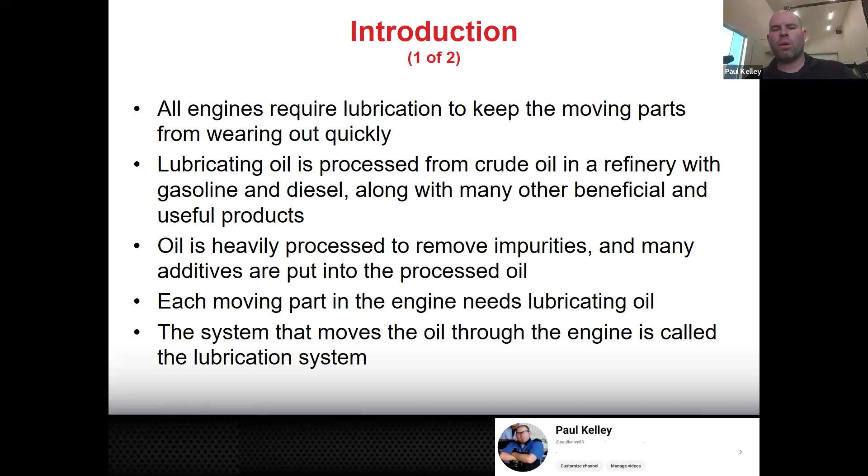In the refining process, they will make tar, like tar to put into asphalt. Asphalt is petroleum based. They'll pull that out, they'll separate it, and then other parts of the oil that they extract will actually become thin, like gasoline, diesel, jet fuel. It can even be used to make propane or natural gas. That's all being extracted or refined from this crude oil.

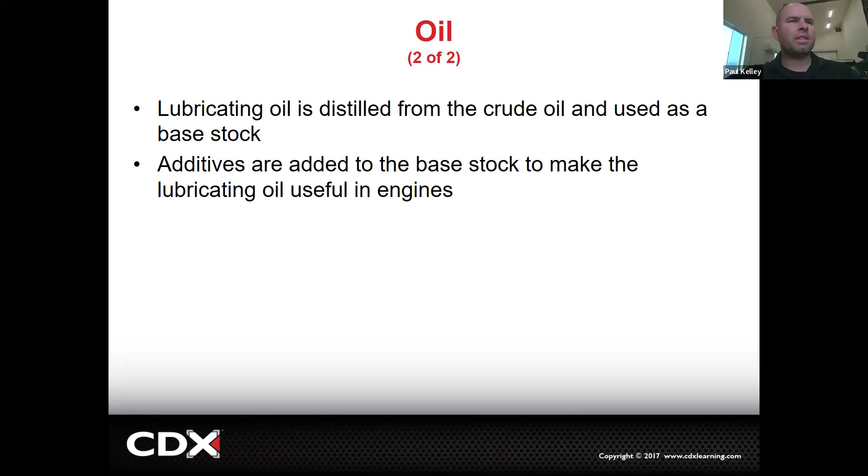I want to actually come back to that in a little bit because the next slide tells you the purpose of the oil. And this is in no particular order, but first thing, it lubricates, right, which just means to lower friction. So to put a quality of oil to the test, it'd be hard to say this one lubricates better and this one lubricates worse, right? Because you'd have to really do that in a lab. They'd probably have to take like a block of steel that weighs a certain amount, put it on another block of steel, put a layer of oil in there, and then measure how much pressure it takes to slide the block of steel. So if the homie's whipping the dipstick out and looking at the oil like this oil is better, that doesn't evaluate whether it lubricates better. You know what I'm saying?

But for a rod bearing, remember the rod bearing is getting punched in the face by the power stroke all the time. As soon as that spark plug ignites, that flame front moves down, it puts a lot of pressure. So that connecting rod is trying to push down and have that bearing surface touch the crankshaft at the rod journal. The oil itself should cushion that. That's part of the reason we need not only just some oil in there, we need pressurized oil, let's say 20, 30, 40 psi, to be able to withstand those power pulses to prevent that bearing from contacting the crankshaft. So the ability of the oil to cushion, that's a hard thing to measure. I'm not really even sure how they measure that, to be honest. I know a little about the friction.

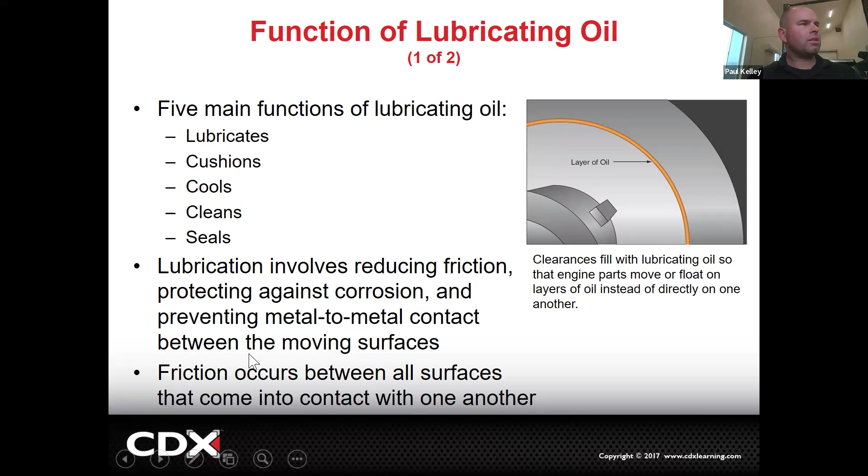Okay. So again, lubrication involves reducing friction, but also protecting against corrosion, preventing metal-metal contact. So that's all the stuff we kind of summarized right there. And then, generally, friction can be good with brakes. That's why we don't oil our brake pads. Friction would be bad for engines. We want zero to no friction from an engine if possible. If you had an engine that had no friction, it would last forever. You understand? There would be no need to replace it. So the less friction we have, the more the engine will last.

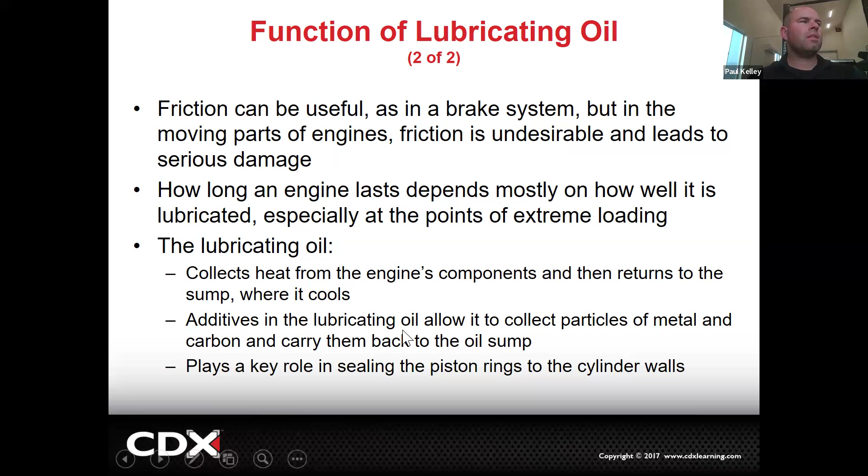And that's not focused on the pistons and the rings going up and down the cylinder. We're more looking at like the crankshaft and the bearings and the rotating parts. We want to be as close to no friction as possible. And so that's generally what it's talking about. It collects the heat and it should return to either the sump to cool or an oil cooler, which we'll cover. We put all those additives in there. And again, it helps to seal the piston rings. So if we were to look at an oil of choice, these are the purposes.

That's not to say you need to use Toyota brand. It needs to meet the API certification. It needs to meet American Petroleum. API is American Petroleum Institute. And then we'll actually come back to ILSAC, okay, International Lubricant Standardization and Approval Committee. So there's basically 2 different ways that oil needs to be certified, and then it's good. It doesn't necessarily need to be one brand or another brand. Okay. But if you look at the 0 and the 20, this confuses people.

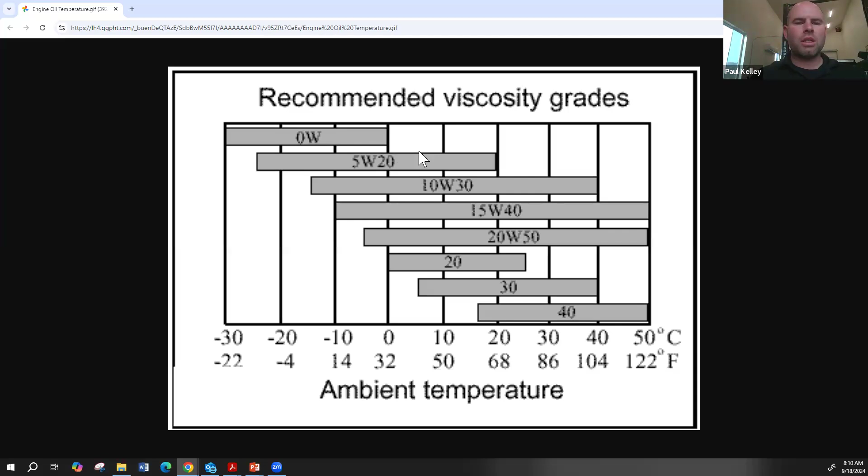So if you look at zero weight, it's too thin to be able to go down to 50. So zero's out. So if somebody says put zero in, you're like, no, zero is, in fact, actually, zero would be fine, but zero doesn't go warm enough. So I actually did that wrong. Let me back up right here. If it goes down to 50, 40 weight's out. 30 weight's just barely in. So on the low end, we have to have the coverage of the oil go below the lowest.

Now, to make this a little more interesting, I'm going to tell you some of the things I've seen on the way in, like in another couple months when it's December, or at least end of November, when we're on our way into Cypress at 6:40, 6:30, look around. You may see frost on some of those buildings occasionally, not every year. If you see frost on the building, you're not at 50, you're at 32.

All right, so let's just say the customer lives somewhere where it gets a little colder. Like for me, this morning was 47. In another couple months, I'll easily be hitting below that 32 number. That means for me, the 30 won't work. For you, the 30 may work, but for me, the 30 won't work.

Let's just say the customer in the 4Runner says, oh yeah, I might go to Big Bear. Okay, cool. Well, Big Bear, you might actually get to, maybe not, but maybe the 14 number. If you're going to see 14 for the low, the 20's way out, the 20W50's out, your 15W40 would be maybe just on the line. But let's say it got to 13, now your 15W40's out. So you really can't run 15W40 if there's any chance of going to Big Bear, right?

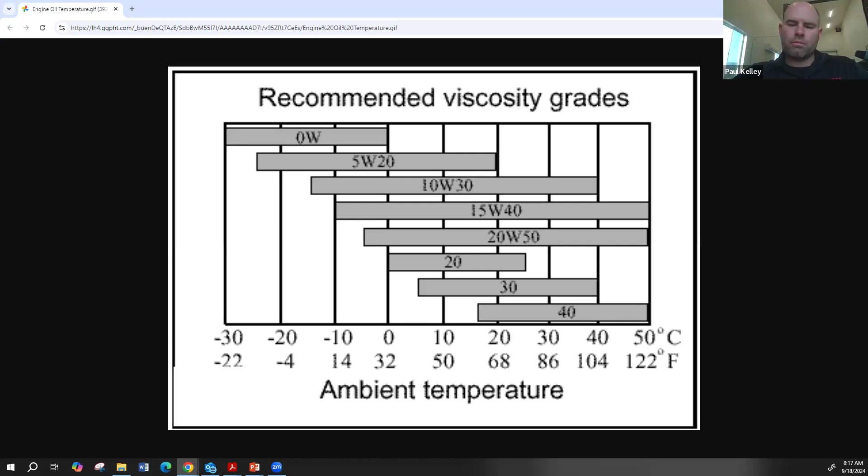So I spent a good part of my life learning the facts and learning the truth and trying to give it to you. You just disregard it for something that someone else said. You know what I mean? Let it go. Let it go. But as far as the facts go, service manual. Sounds good. Mitchell, you got your question now.

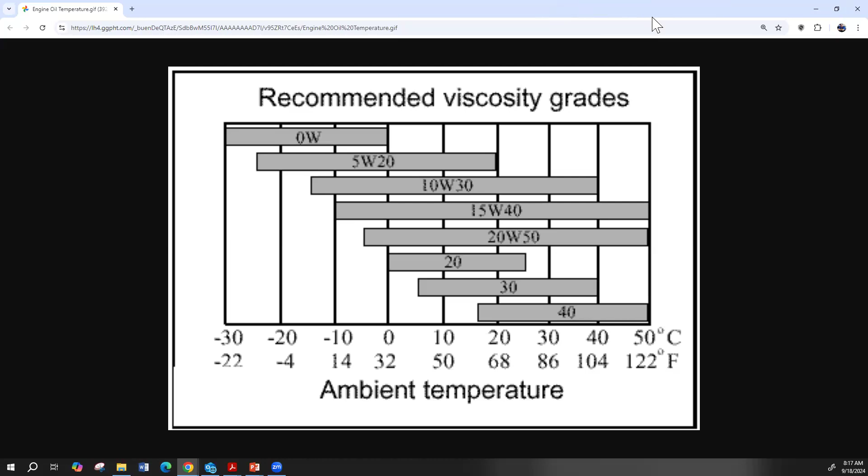It's not really a question, but once we had a RAV4 come in that was sold in the Mexican market, it had a Toyota Tijuana plate on it, and the oil cap said 5W30. And think about why. Mexico's south, right? So Mexico's significantly warmer. If it's warmer, you want a thicker oil, right? So in Mexico, they don't have places that are going to get below zero. So it makes sense, and you're exactly right. It has to do more with the climate.

So back in the day, they used to give us these types of things, but now they just don't really give us those charts anymore. So essentially, as the dealership technician, I'm instructing you, follow what the service manual says. And if the service manual is a US based service manual and the car's in the US, I would not be doing what the global market service manual says, because that's not where the car is. Kind of makes sense. All right, cool.

So now we'll jump in a little bit more because we're going to talk more about the oil. So here's your viscosity. High meaning the higher number. The 5W30 is a thicker oil than the 0W20. So the high viscosity 5W30 is going to be slower pouring, and the low viscosity is going to be quicker. That's how they measure it. And that all has to do with how the oil is going to flow through the system.

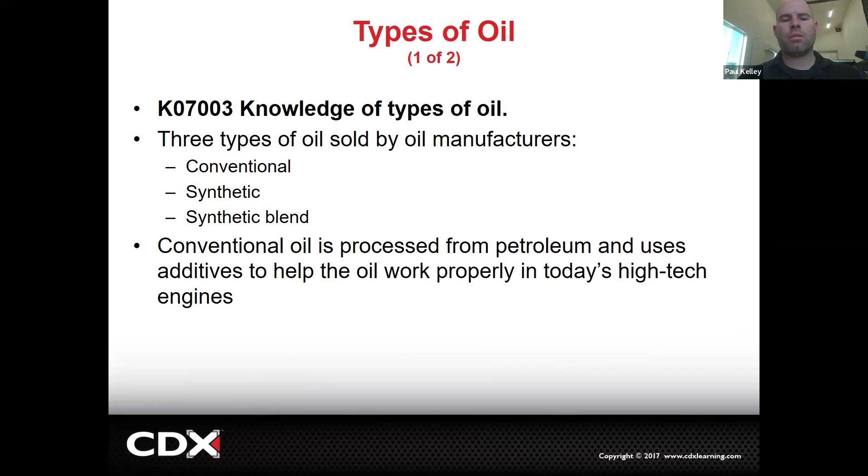Here's literally pulling oil out of the ground from those underground wells. They pull a bunch of stuff out, like they pull the wax out. They'll actually use the wax for candles. They break it down. They could break it down into basically what's considered mineral oil and then combine the additives.

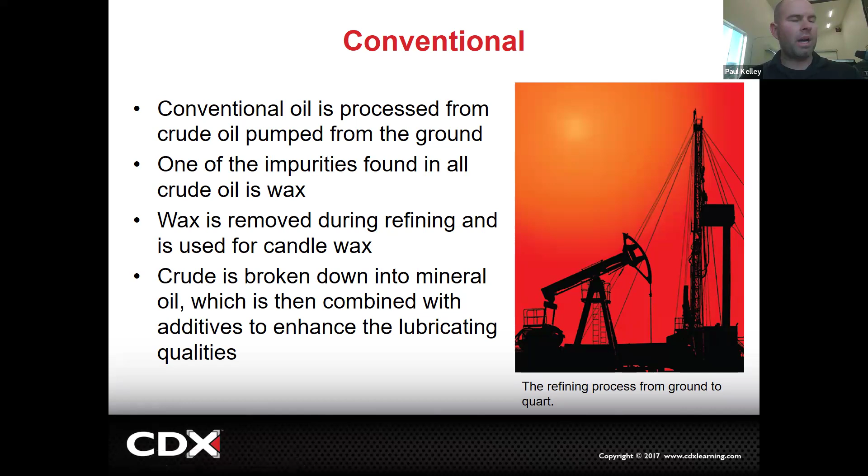And then let's say you had synthetic. So type 3 is not exactly a true synthetic. Like they do more refining, but it's a bit different. Type 4 is it never came out of the ground. They made it in a lab. They formed it in a lab. But both of them are more costly to manufacture.

So if you want a synthetic oil, cool. It's going to be more money. It just is. It costs more money. You don't get to pump it out of the ground. You have to actually manufacture it. It takes more time. And then advantages. Okay, so we could go into a ton of detail, but we'll keep it simple. Better protection against engine wear, so that's friction. Can operate at higher temperatures.

So everything we saw on that previous page, I don't know if that was for synthetic or conventional, on that chart. I'm not sure. That was for whatever that vehicle called for. It's probably conventional, right? They have better low temperature viscosity. So when you want to actually be able to run to a lower temperature, you could change over to a synthetic. Fewer wax impurities. So wax impurities, do this word here, coagulate.

If you guys ever cut yourself and your blood leaks out, what happens? Put a Band-Aid on it. Okay, you can put a Peppa Pig and George Band-Aid. But what happens when you take the Band-Aid off, you're no longer bleeding. How come? Starts with an S. What's it get on there? It grows something. Scab. Exactly. A scab is your coagulation from your blood.

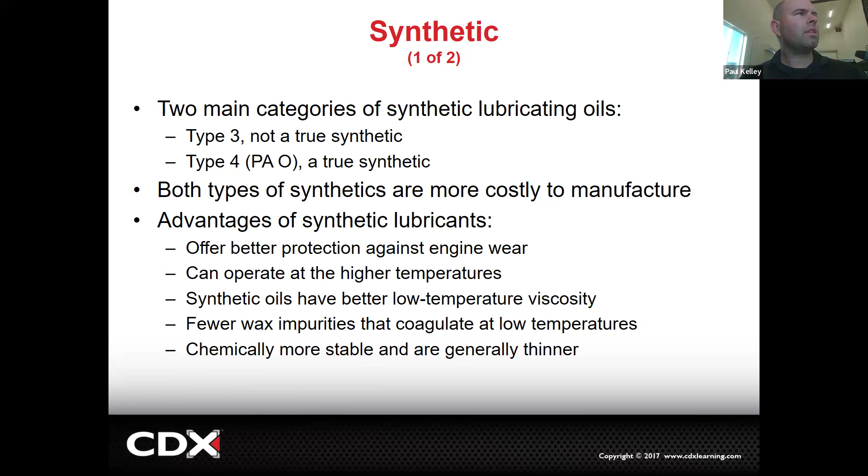Okay, but it's also chemically more stable. Some people would say the thinner oil tends to find the leak, and I don't know about all that, but there's some reputations about synthetic. And another thing I'd like to clarify here is, big question is, if you ran conventional, you can't change over to synthetic, okay? And that is not exactly true, but I'd like to clarify somewhat.

If let's say you're running a conventional oil the entire life of the vehicle, let's assume, it's not necessarily true, by the way, let's assume that oil has less cleaning detergents, cleaning agents in there. That means it's not going to keep the engine as clean, right? And those imperfections and those debris are going to be in the engine. So basically what I'm telling you is the inside of the engine is going to be kind of dirty.

Now, if you take that conventional that's been in there every 5,000 miles for 100,000 miles, and you put a synthetic in there, and the synthetic has a lot of cleaning agents, the cleaning agents are going to clean it a lot, right? So the oil flowing through your system is going to look like what?

I think, how's it going to look if it's picking up all the imperfections as it flows through the system? Dark. Exactly, dark, dirty. It could have too much debris in it. All of a sudden, you might have more debris flowing in your oil than you ever used to. And that's where some of these, whether true or not, horror stories would come from. Like, yeah, I went with synthetic and the engine seized up. I went with synthetic and all of a sudden I lost oil pressure because all this debris was on my pickup tube and my sump.

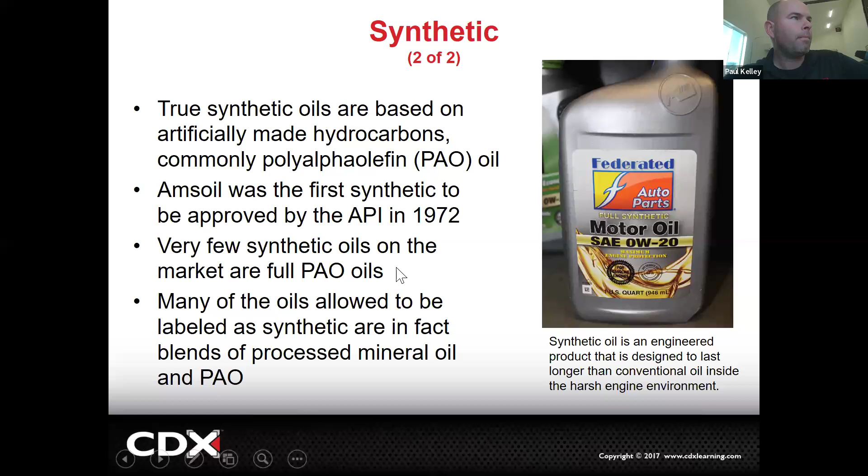Then let's say you buy oil that's high mileage. Generally, the main purpose of a high mileage oil is they put some additives in there to make your seals swell up, like your rubber rear main and valve cover gaskets and stuff. It'll actually make them swell up, and that might potentially help the leaking problem. It's not a coagulator though. It doesn't coagulate the oil. It just swells the seals, maybe.

And then some of these higher mileage oils have extra things like polymers to lower the friction even further. So generally speaking, a high mileage oil is actually a better oil than just the regular. So I've actually got right here Mobil 1 5W30 and Mobil 1 5W30 High Mileage. And the only reason I got the high mileage was because it was on sale.

I don't need high mileage because my Hummer now has like 180-something thousand, but the engine's got like 5,000. So it's not high miles. The truck is, but the engine is not. And we got the Camaro, and I think the Camaro has 35,000 miles. I don't have anything with high miles that I need to change the oil in. My motorcycle has some high miles, though. That's the workhorse for me, right?

I don't need high mileage oil, but it was on sale, and it has these additional additives. I probably don't really need the seal swelling agent, but high mileage is an improvement, at least marginally. So if you have a low mileage engine, to say you can't put high mileage oil in it, that's not really true. It's not necessary. I wouldn't charge the customer more money for it because you don't need extra polymers or seal swelling agent. But if it's on sale, it's fine. Okay, so that's why I got that.

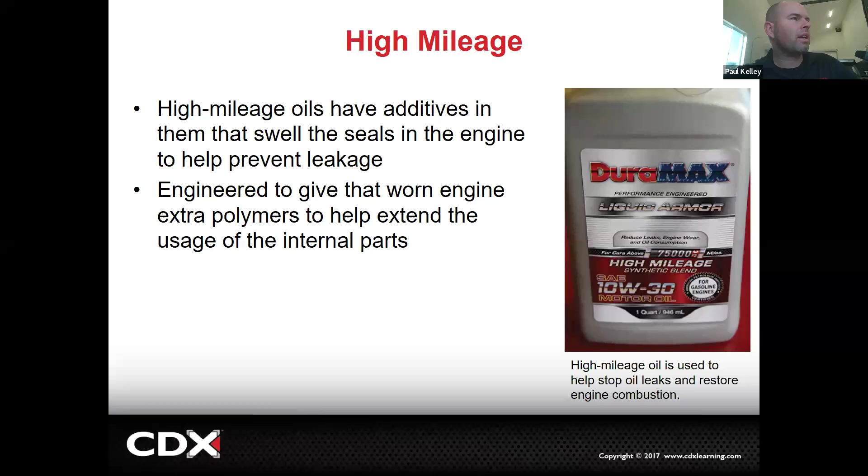And then there's some heavy duty stuff like, for example, Rotella T, a pretty well liked product, but this is SAE 15W40. This is actually really made for diesel. That's not to say someone may not run it in a gasoline engine, but the diesel oil is much more demanding. A diesel compression ignition engine has a lot more heat, a lot more pressure. From the factory, those things are running like 30 PSI of boost. So trust me, they need to hold up better. You could, in some cases, run a diesel oil in your engine and have the engine be happy.

But here's the problem. All engines burn a little bit of oil, and that burnt engine oil ends up going through the exhaust and your catalytic converter. I'm not so sure your cat is going to be happy burning a little bit of Rotella T diesel engine oil, so that's the main reason I wouldn't really recommend it. They are a little different, gas to diesel, so consider what you're buying. If you're running a diesel work truck that calls for a 15W40 and you see Rotella T, which is usually pretty well priced, that could be good, but you don't really want to run it in your gas BMW that gives you this viscosity range.

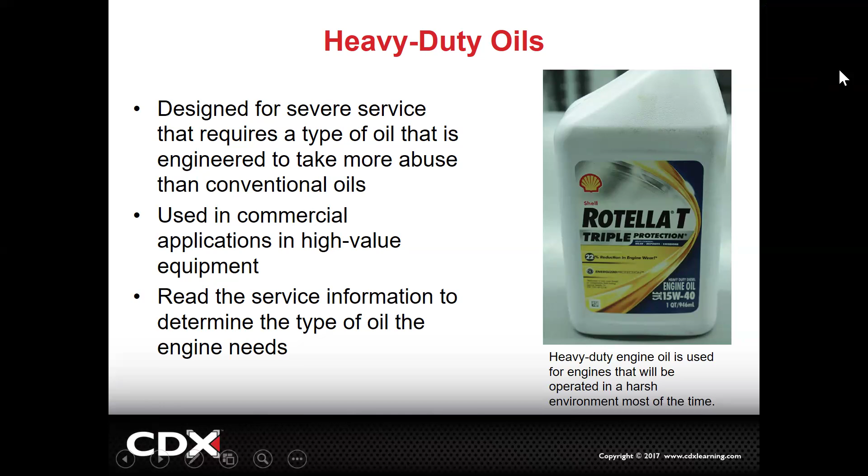Colin, I see your hand again. Did I miss you? No, I think I forgot to lower it down. Okay, very good. I forgot to lower it too, so we're both guilty.

Now let's jump into additives. Extreme pressure additives, oxidation inhibitors. You guys know what that is. So extreme pressure has more to do with the rod pushing down on the rod bearing and crankshaft. Oxidation. Who knows what oxidation is?

Oxidation with iron is like rust. It has a reaction with oxygen; oxygen breaks it down, basically. The paint or clear coat on the roof of your car, with too much sun, you'll see will become oxidized. The sun kind of breaks it down, then it's exposed to oxygen, and it basically flakes off. So oxidation is breakdown by oxygen.

Corrosion inhibitors are essentially stopping your engine from rusting inside. Unfortunately, you're going to have some traces of water in your crankcase. And if the oil doesn't have a good corrosion inhibitor, you can actually end up with rust in there. So we add these.

Anti-foaming is an interesting one. When your crankshaft is spinning, your oil level should be below the crankshaft, okay? They shouldn't touch. But even still, your oil's getting sucked up by the pump and churned through the gears and all that stuff. You don't want your oil being frothy. Let's say you make yourself a smoothie and run the blender, it gets kind of foamy, kind of airy.

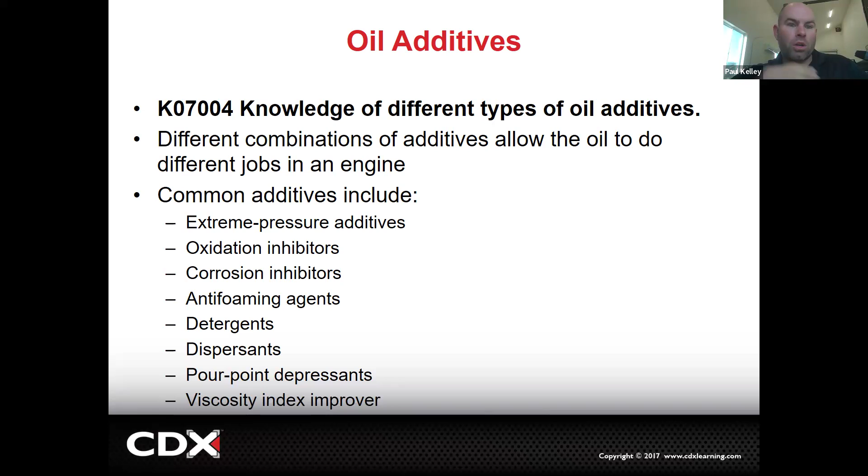Pour point depressants and viscosity index improvers both have to do with stabilizing the viscosity. Mainly to make it a good multigrade that can go down to negative 22 degrees but go up as high as 122 degrees. So we add a bunch of stuff in there. This all costs money, obviously.

And then ultimately, again, deviating from the standards, that would be where you would be wrong. If you recommend the oil the service manual calls for, you're functioning exactly how you were designed. You are not designed to be doing statistics and giving advice on which oil. You just don't know. Okay.

Just be really honest. If you sit down and you're honest with yourself, you have no idea if the super moly, ultra mega, super duper gold plated oil is better. You don't. You just don't. You have no idea. Okay. Somebody else does, and that's why somebody else publishes which oil you should use. Cool.

Then API gets in there. API is the American Petroleum Institute, and they set the minimum performance standards for lubricants. So when API sets the minimum, all the oil manufacturers have to pull up to the bar. Then they have to send it into API, and API tests it. If it passes, API gives them API certification. Then they can put the little starburst symbol on their product.

Kind of makes sense. So now if you look, oil rated S cannot be used in compression ignition. So wait a minute. S. Anybody think they know what S stands for in this case? Because it doesn't give a lot of context here. S, compared to compression ignition engines, which need the C. What ignites the air fuel mixture in our gasoline vehicles? What starts the fire? Spark plug.

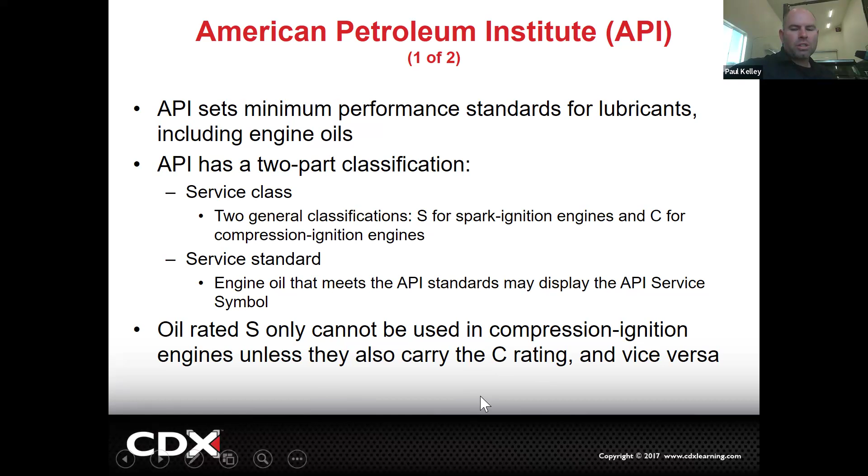Exactly, spark. S is spark. That's it. S is a spark engine. C is a compression engine, which basically means diesel. Cool. So they're different; that's what it's saying. This gets all into API. So SN, GF-5, these are the standards.

And by the way, a while back they went to energy conserving or resource conserving. So the government is involved in this. The government wants them to remove a lot of the harmful things. Zinc, for example, was really good for flat tappets coming across the cam. The zinc would really lubricate them well. Zinc is not so good to be coming out the tailpipe.

And so the government's involved in making them cleaner, hopefully achieving better gas mileage and stuff. So there is a little bit of input as far as making them better for the environment.

It's not all on performance. So when I talked with an engine builder and tuner, I usually want to get other people's perspective, right? So this is not a manufacturer guy. He doesn't deal with the manufacturer at all. People bring him their cars and he builds them hot rod engines and does tunes. It's cool stuff you guys would like. But he's never really had the manufacturer type training. He's a builder, you know what I mean?

He makes cool stuff. So I asked him, well, what oil would you recommend? He said, well, I used to run Royal Purple, but then I would take these engines apart and they'd be all dark in there. And I would be looking to see if maybe I had like a PCV leak or combustion blow-by or something. And I don't run Royal Purple anymore because I just don't like the purple dye. So he kind of had a little beef with Royal Purple because of the dye. And that doesn't say that Royal Purple's bad. He just doesn't like it because of the dye.

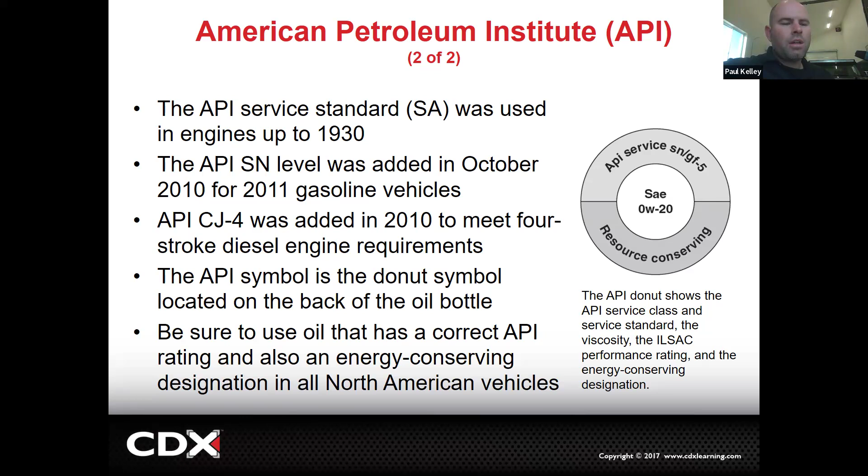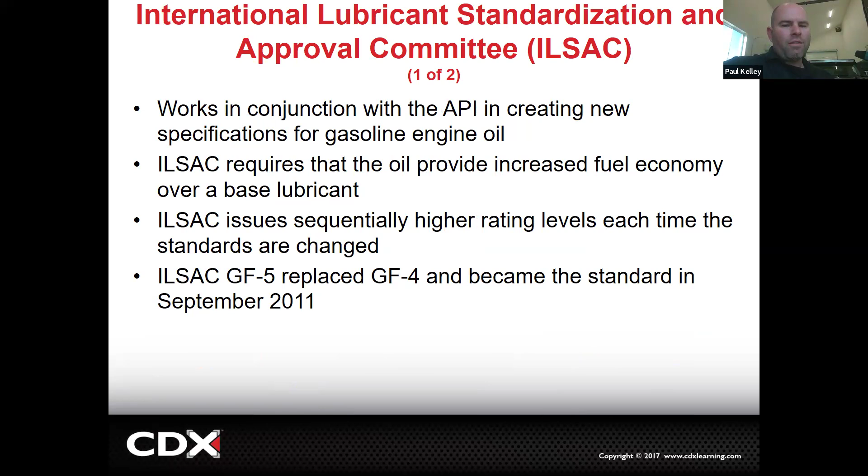If I'm going to shoot from the hip and make my determination, though, I'm probably not going to listen to an engine builder who started a little bit of a conspiracy theory right there. I'm going to probably go with the fact that the manufacturer will stand behind the product and offer me a new $14,000 engine if it fails, if I'm using the Mobil 1. Makes sense? So that's really my stance on it. But I'm telling you right now, I don't have the facts. I don't have the qualification to make the call, right? So if you're following what the manufacturer calls for, that's exactly what I would do to keep yourself out of trouble. If you become more qualified and you can come back and teach me something, let me know. You got my information. Cool.

So ILSAC jumps in and says ILSAC GF-5. I want to come back to this ACEA, API, which is SN, SM, and SL. So it meets all of these. Remember, it goes L, M, N in the alphabet. So if you have a car that calls for SL, this meets it. If it calls for SM, it meets it. If it calls for SN, it meets it. If a new one comes out, SO, it doesn't meet it, right? So it's almost like backward compatible with anything SN and older. But if SO comes out, this oil would not be good enough anymore.

It also meets Ford WSS standard, another Ford WSS standard, GM Dexos, Honda Acura HT06, right? So essentially what they're saying is, hey, this oil is certified by this one and that one and this other one. This oil is certified to everybody's standard. That's actually part of the reason I keep a bunch of Mobil 1. If you look, that's what this is. This is a Mobil 1 oil. It's actually guaranteed to protect for up to 15,000.

I'm not going to try it, by the way. I'm still changing my stuff early. That's kind of another side discussion. But the Mobil 1 oil, I believe, you know, the oil itself won't break down. The additives are going to be excellent. The corrosion protection, the temperature, all that type of stuff, I'm sure is amazing.

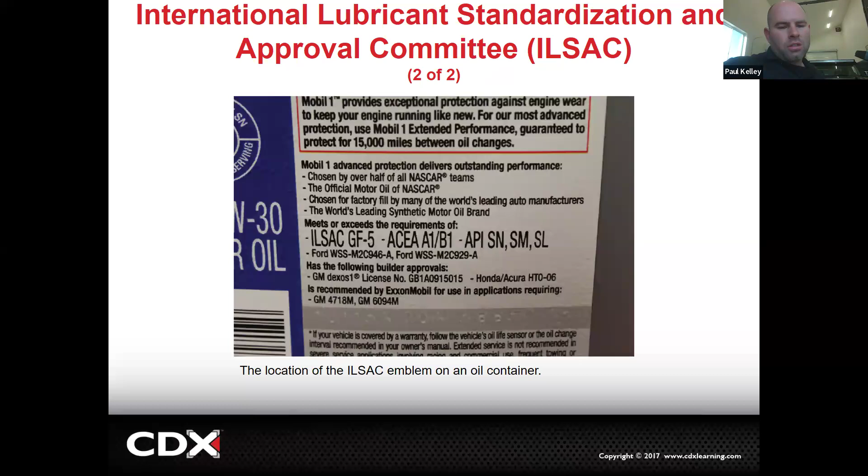However, would I recommend that to a customer? I probably wouldn't because it's just not my qualification. I'd say follow what your service manual says. I'd go with the service manual, not the back of the bottle saying 15K. The service manual wins out again. Okay, so a little plug for the Mobil 1 just because it meets all the certifications right there. So if I want to keep one oil on the shelf, I keep Mobil 1, and that's going to be great for like everything I touch.

Now, SAE, again, that doesn't stand for straight 30 or straight 50. SAE, that's Society of Automotive Engineers. So they also set the standards. They work more on looking at the engine and what the engine needs, and then making standards and making sure the oil meets those standards. So there's a lot of different agencies involved in this oil. Cool. And that's basically the summary.

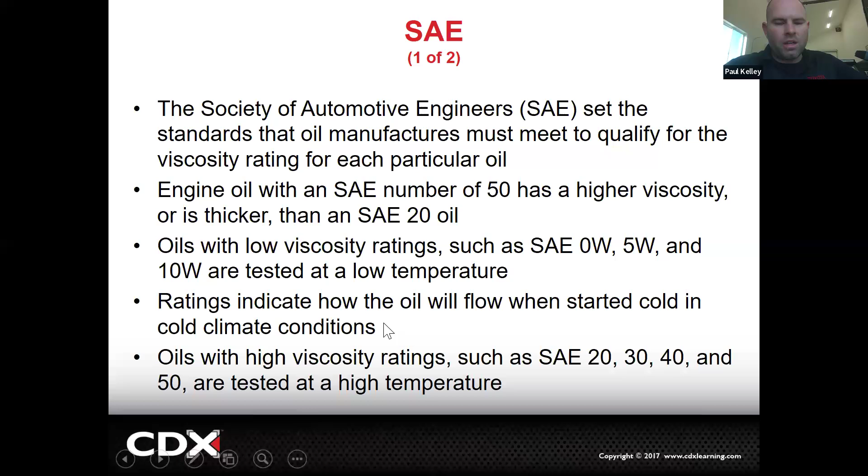We'll go with SAE. A modern oil blend of oils that combine properties of oil and the desired outcome and all sorts of additives and everything. So to meet the SN, they're going to need to have all sorts of additive package. So if it meets SN, don't think it's junk oil. Guess what? Walmart SuperTech meets SN. So if it meets the standard, it's not going to be trash. It's not to say it's going to be much above the standard. It might just barely meet the standard, where something else might exceed the standard. But I'm not really sure. We would have to send that out to a lab and have them test it.

Okay, so a cool YouTube thing to check out if you're interested, it's called Project Farm. That dude spends hours and days and weeks making a video to compare one oil versus the next oil, including having the lab results. They do some really cool stuff. And as far as I can tell, it seems legit. So they would have way more info than me because they would take that time to go through those tests.

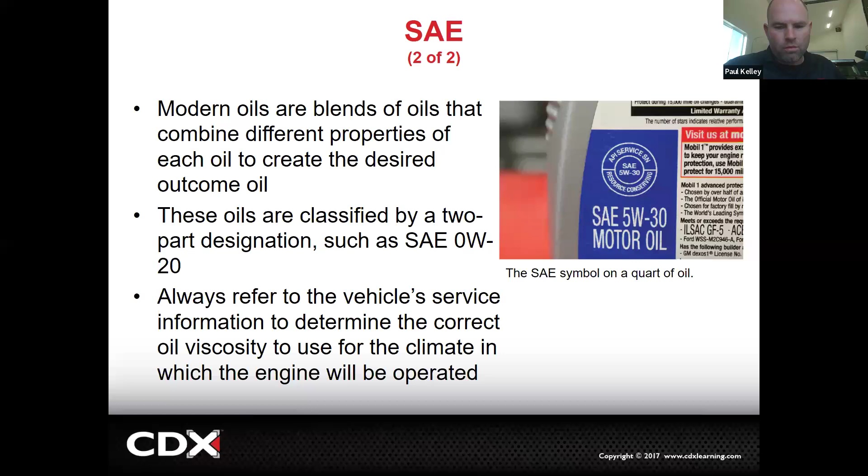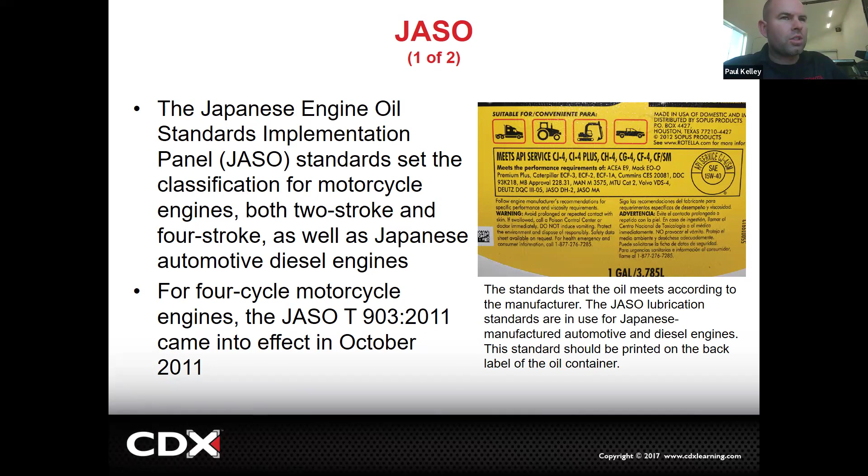And then JASO is Japanese Oil Standards Implementation Panel. So it's basically like what API, American Petroleum Institute, does, except in Japan. So if you really dig in the Toyota service manual, a lot of times it may call for JASO standard X, Y, and Z. But again, we're doing it kind of our way. So if it meets our stuff, you're going to be good. But if you look for it, cool. And then ACEA, remember I mentioned that one, European Automobile Manufacturers Association. So that's the other one. The different major continents seem to have their own.

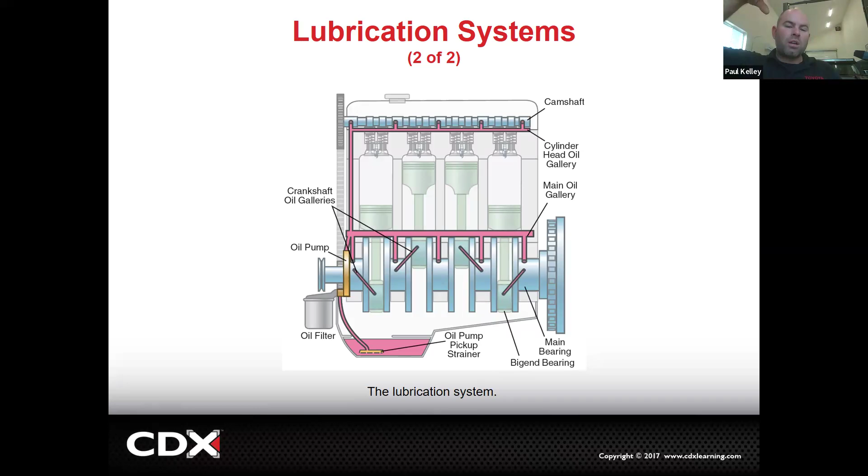Okay, here we go. That's some of the reasons that people will buy some of that Lucas oil treatment stuff, because they'll have a little display where if you put Lucas oil in it and you turn the gears, the Lucas oil will cling to the gears better. And so that was one of the sales gimmicks from back in the day.

So as we consider, all of this stuff right here is what's called pressure fed. Pressure fed means the oil pump sucks it up and pressurizes it at PSI. Let's say our goal is 40 PSI of oil pressure. That might be at a certain number of RPM or whatever, but let's say 40 is our goal. 40 pounds per square inch of oil pressure should be spraying out of all these little passages. That means it's force fed, basically. That's one aspect of lubrication.

That's always how crankshaft main journals, crankshaft rod journals, camshaft mains are fed. We don't really worry about the cam lobes. Those aren't pressure fed, but all those are gonna be pressure fed. If it's got piston cooling jets, those are gonna be pressure fed. The oil galleries are all gonna be pressurized, even though we're not really trying to feed them. We're just using them to transport oil.

But when there's a plug on the side of the block or something, and it goes to an oil gallery, that sucker is pressurized in there. You take that out, you might be able to actually put an oil pressure gauge. Or if you want to do your 3-pod A-pillar race car stuff, and one of them's oil pressure, you may have to run a little oil line or an oil pressure sensor that uses a wire. You're just going to punch into one of those oil galleries, and that's going to give you the pressure of the whole lubrication system. The pressure here should be the same as the pressure here, which should be the same as the pressure there, unless you have some sort of restriction in the oil galleries, okay?

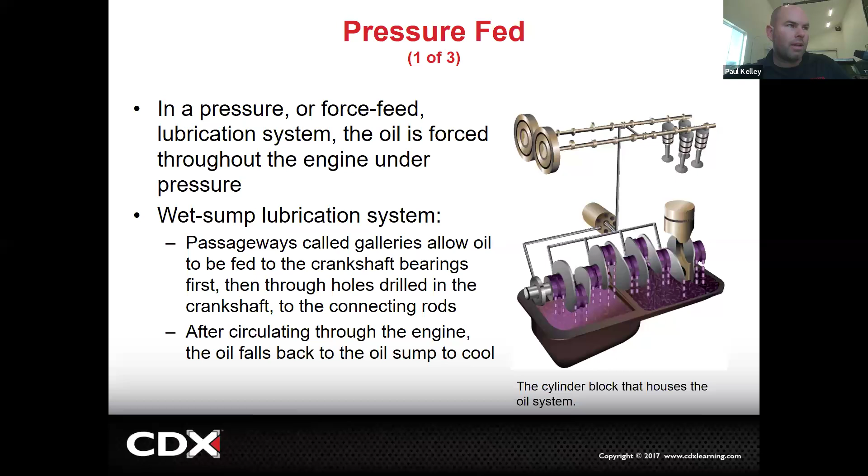So if you wanted to have a race car, a real race car, you probably want it to be a dry sump, because there is no oil sloshing around. The oil is held in a tank and the pickup is deep into the tank. And even going around extreme turns and upside down practically, it would keep the oil not only not foamy and aerated, but it'd keep the pickup well submerged in the oil no matter what type of turns you did. That's the main difference between wet sump and dry sump.

There's not very many cars out there that were dry sump, but I recall when the first C6 Z06 came to the shop at the dealer, and the PDI guy, who was smart, he knew a lot, went to check the oil and he started freaking out, like, this thing doesn't have oil in it. I don't know what to do. And he was a guy who knew a lot, but didn't really know how to follow the service manual well. So he started kind of freaking out. He ended up actually going and getting the foreman, and the foreman was like, I don't know. We've never had one of those before.

It was the first one we ever got, which I got stories about that car. I'll tell you. Good memories. I'm not sure I'll say it on video though, but it was a cool one. That was the first 505 horsepower factory, V8 427 dry sump, 6-speed, dark blue, just good times.

He checked the oil and there was no oil on the dipstick. He's like, what the heck is this? So he literally started it up, drove it in, shut it off, checked the oil, no oil on the dipstick. And the dipstick went into the oil tank. And it was just kind of weird. He went to the foreman, looked it up on service info and said, oh, you have to shut the engine off and you have to wait 3 minutes before checking the oil. So they went back down from his office and they went to the car and checked, and it was perfect.

So the way you check the oil level on a dry sump is different, because the oil doesn't just fall into the sump. With the dry sump, the oil has to slowly return through the oil pipes and all that type of stuff, which will slowly bring the level up in the external oil tank, which a lot of times can have like cooling fins and stuff.

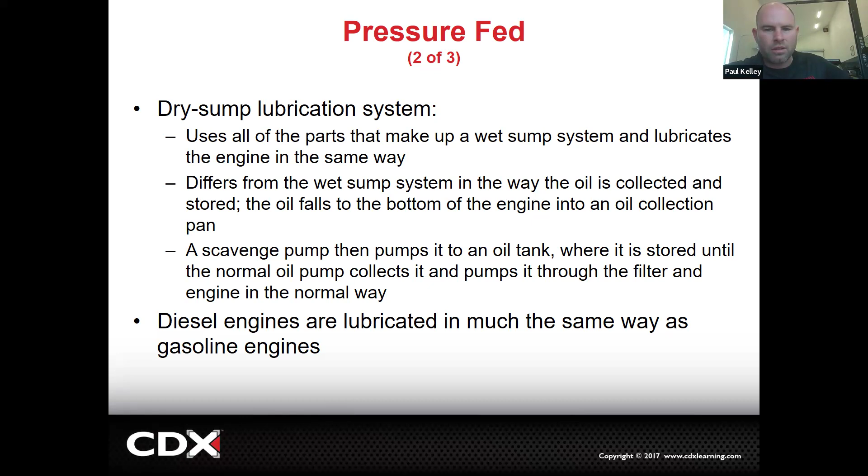Other than that, the dry sump would need to have a scavenge pump, which pumps it back to the oil tank. So the scavenging pump basically scavenges the oil and gets it back to the tank. It's kind of interesting. Okay, so that's the main thing about those. And we talked about pressure fed again. I think we're probably pretty good just understanding diesel engines have different levels of heat, different levels of pressure, just different demands with those compression ignition CI engines.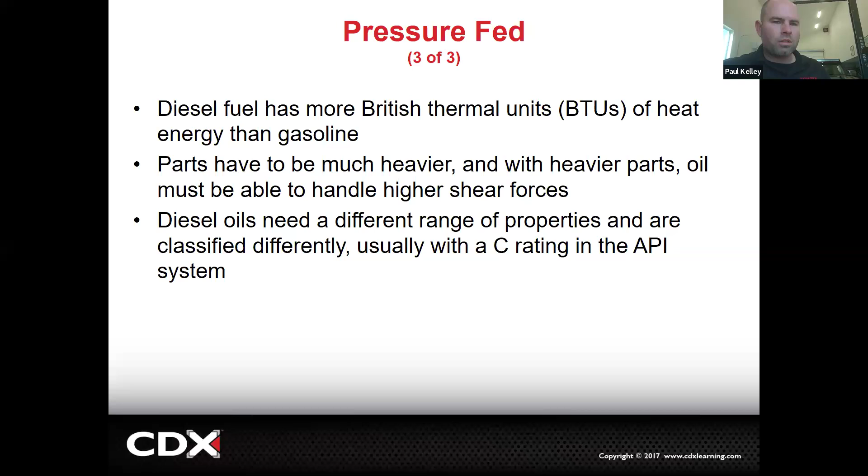Okay, then there's another type of lubrication. And this one's splash. Splash lubrication is literally just stuff that gets splashed. Splash lubrication, it's hard to go wrong. Like on this old air-cooled piece of crap, they would have a little dipper, they called it, and it would come around and hit the oil, and it would just sling the oil up here, sling the oil over here. Everything was just kind of getting splashed with oil. Does that sound as precise, or does it sound a little more approximate?

It's just kind of approximate. It's like, yeah, it's going to get splashed. By how much? I don't know. What's the pressure? There is none. We just hope it gets splashed. So it's a reliable system, but it has no way to cushion the blows of a combustion stroke because it's not pressurized through a journal, but it's simple.

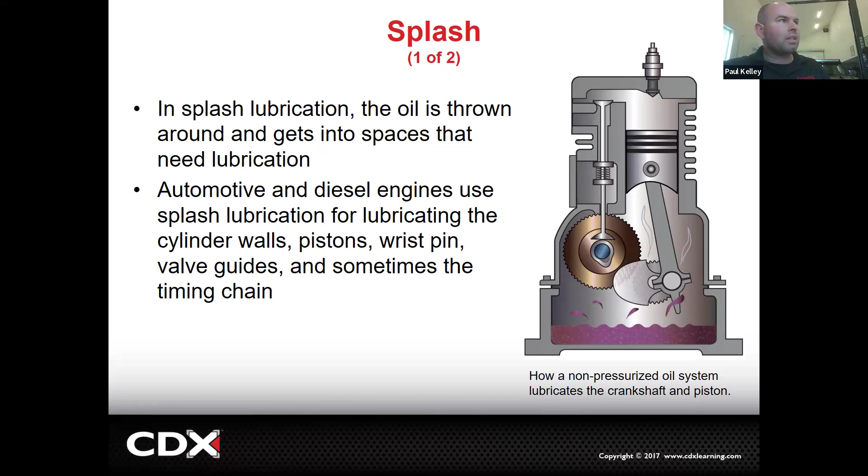So we don't do a whole lot of that, but even within our modern engine, there are still things that are lubricated just by splash. A lot of times we'll send oil up to the head, and once it gets to the head, we just let it splash around and lubricate some stuff. It's not real precise. Okay. So it could be either, especially on small engine stuff when they talk about horizontal crankshaft with the dipper and things like that. All right, but now here's the more modern system that's really extensively explained.

When you're in warm up, the coolant's kind of warm, but eventually, let's say your coolant stabilizes at 200. Your oil under hard work and going up hills, your oil could get hotter. So if your oil was 220 and your coolant was 200, you're actually going to pass heat into the oil cooler to cool it down, right? That's how an oil cooler works.

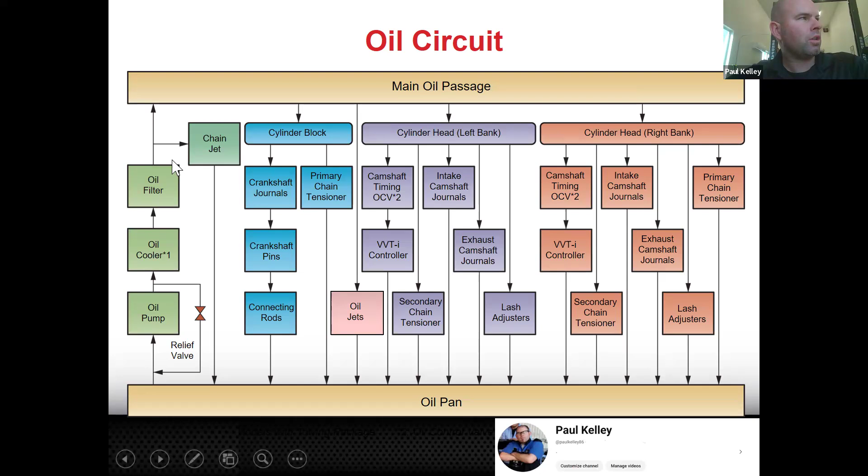I talked to somebody who's a foreman at the dealer, and they said they had one where they thought it was a filter. They put a new filter on it and it fixed it, but it's not supposed to. So I take that with a grain of salt that it might have been something a little bit different, because anytime an oil filter clogs up, the oil should just bypass, which means the oil is unfiltered, but not causing low oil pressure. Okay, that's what you need to know. Cool. Now we go to this.

It's because you're trying to get the gear in the right spot to slide onto the flats that are on the crankshaft. It could be a little tricky, right? That's its location. Here you can see it gets sucked up right here, goes in, goes to the oil filter, and then goes out to the main oil gallery to all the places it needs to go. That's what it looks like as well.

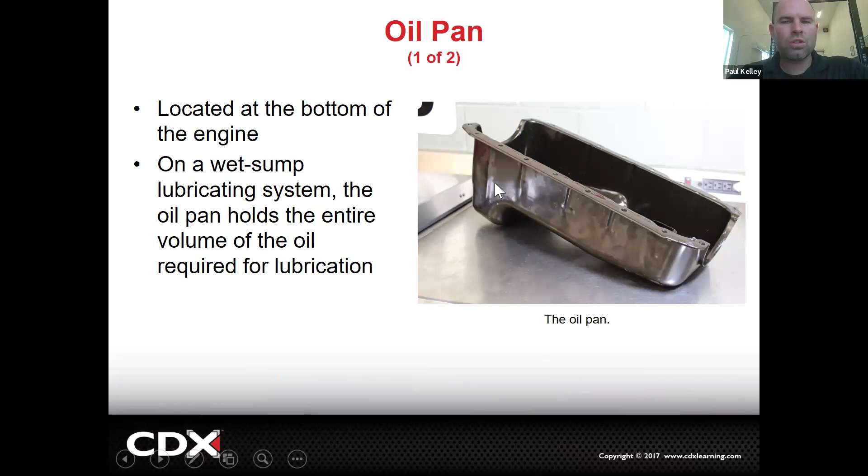And then here's your oil pan. So you'll notice the oil pan gets really deep right here. Where it's deep, that's called the sump, and that's where the oil pickup tube goes down, and it has the pickup and the filter, the screen. So that's common. Here's your drain plug, you know about those.

And then here's a windage tray. So the purpose of a windage tray: the crankshaft is above and the crankshaft's whipping. You don't really want oil being whipped up because then it makes it into that foamy smoothie, okay? If you were, for some reason, going around a lot of turns and your oil were sloshing all over, it could tend to get foamy and whipped up. So we put what's called a windage tray. The windage tray is supposed to keep the winding action of the crankshaft away from the sump where the oil stays. That would be a little bit of a high performance design. A lot of them have windage trays. Cool, that's kind of typical.

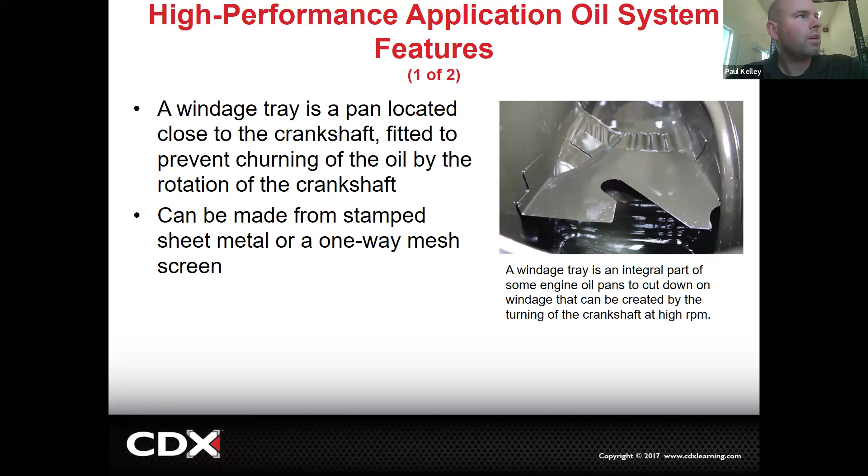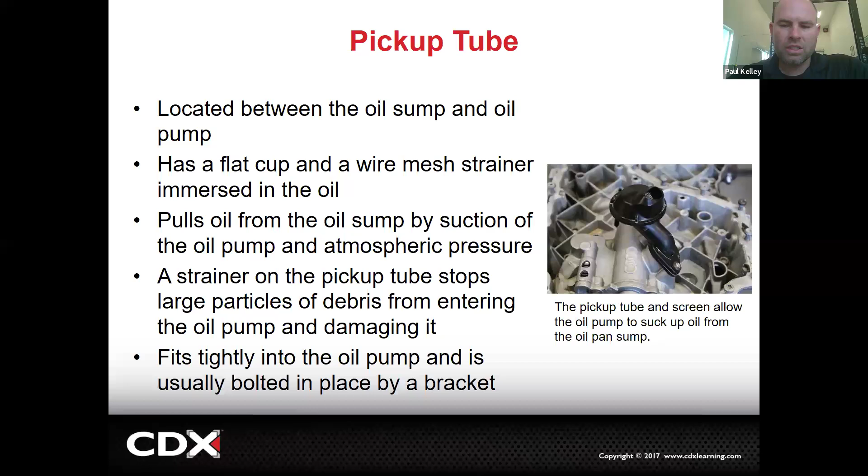And then that's summarizing. Here's a pickup tube that's actually plastic, and it comes right off an oil pump on this Audi that's bolted to the bottom, and that's actually driven by a gear off the crankshaft. So they can vary. Sometimes they look a little bit different, but same idea. If you look in there, there's a screen. You can see a bit of it. Okay, so that's supposed to poke down into the sump and stay submerged, but also do a little bit of rough filtration. Like if it's a big string of FIPG from your timing cover reseal, the screen is going to stop that from getting sucked up into the pump. But other than that, not by much.

Now, what we talked about already regarding the sprinklers and how to make oil pressure. Oil pumps are positive displacement. That means the more quickly the oil pump turns, the more it's going to move. So in theory, at least, the higher the pressure will be. The pressure is determined, like it said, by bearing clearance and the amount of oil. So if you wanted to increase your oil pressure, you could rev the engine. If you have an oil pressure gauge, a lot of times revving the engine will change the oil pressure. That's because the pump is pumping more.

But it also has to do with how many sprinklers are installed, right? If you have too many sprinklers, your pressure drops. Too many meaning more like leaks in the system, not an oil pan leak, not a valve cover leak. That's like a seep. That's losing oil over time. A leak would be like an oil cooler that's pressurized literally spraying pressurized oil out. That'll lower it. And that would be pretty apparent. So we don't normally get a low oil pressure concern for a major leak. We just don't. It would come in for a major leak, not for low oil pressure. At the time that it's smoking and catching on fire, they're probably not like, let me check my oil pressure real quick, right? So they're different focus.

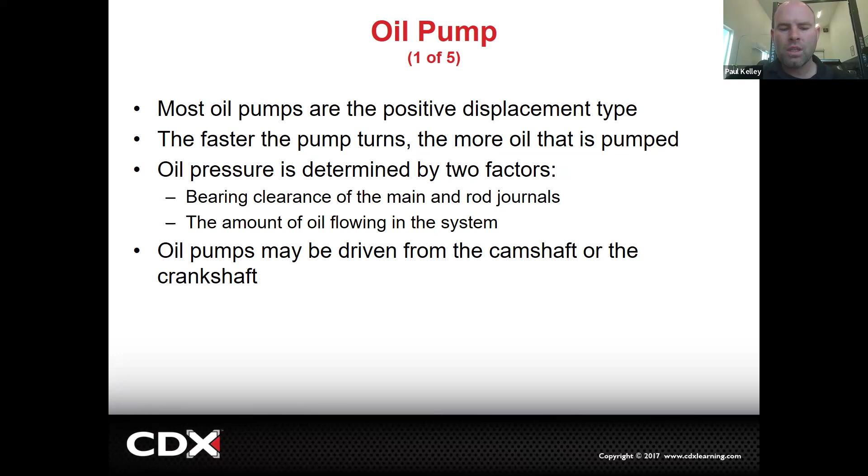The only reason it would matter to us is if we have a vehicle with low oil pressure and we think it might be due to a worn pump, which, by the way, it might be due to those worn bearings too, remember? But if we think it's due to a worn pump, we have to take these apart. We have to perform precise measurements on each of these parts, and then we can tell what's worn. The way we measure a rotor type, the way we measure a crescent type, the way we measure a geared pump, we measure those differently. But other than that, we don't really care what type of pump it has in it until we have to measure it. Cool.

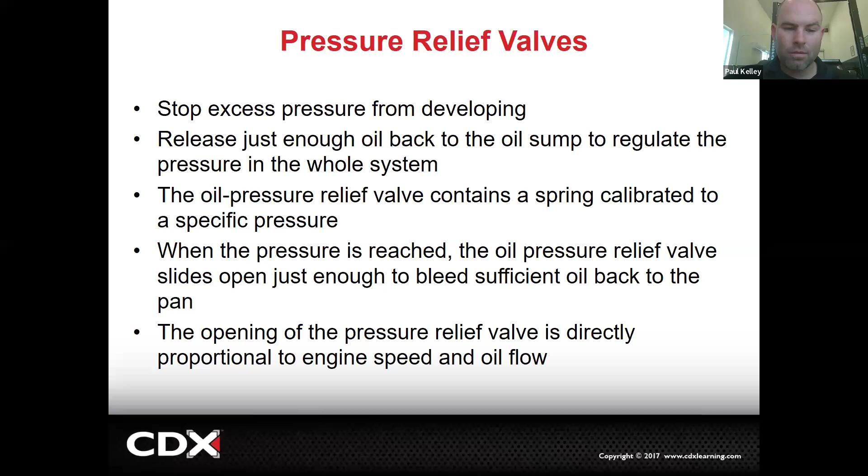And then the pressure relief valve, I told you, remember that car with 15 or 20,000 miles that had the locked up engine, it had nothing to do with its oil pressure relief valve. So I wanted to make sure you guys heard that. And I actually had to show him the documentation. They showed him and he stopped. He's like, okay, I messed up. I can't really try to blame you or blame the car. I can blame the homie, but the homie's not going to pay for the damage, sadly.

Okay, so that's kind of the thing. Now, this talks a little bit about the factors, but what I want to do is summarize that a bit later. Oil pressure, guys know the job of oil pressure. There's two types, but the bypass is much more common. A full flow, that means it filters the full flow of oil. That's less common. That means no matter what, it's filtering all the oil. If the filter gets clogged up, you will have no oil pressure.

The bypass, what's it say? It's more common, especially on diesel engines. A diesel, by the way, may use some bypass and some full flow. Sometimes they have two stages. Sometimes they have one filter for full flow that filters everything, and one that'll bypass just in case they're clogged. But it's kind of interesting. The bypass system is going to be more common. A lot of the cars have bypass. If we were to cut that AC Delco filter in, there's a little diaphragm and it does let it actually bypass. If the filter gets bypassed, that just means the oil goes around unfiltered, but we don't drop oil pressure.

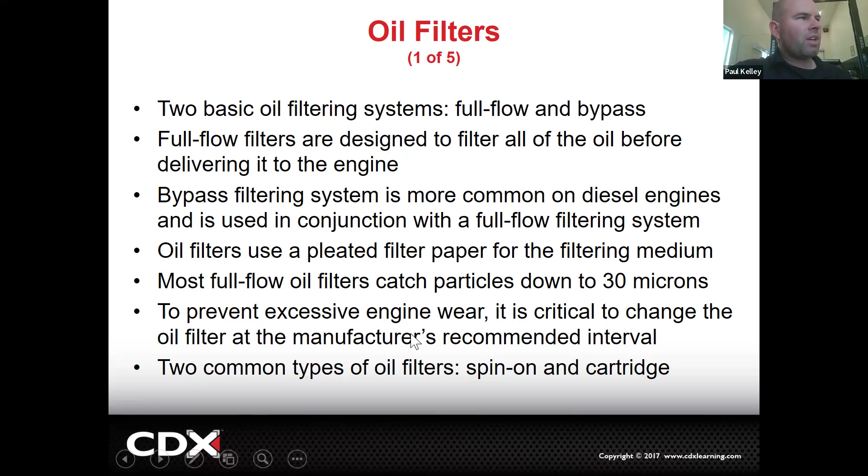Oil filters use paper, so if you were to cut it open, it's actually not really that technical in there. There's mostly paper, and the paper could filter down to 30 microns. It should prevent engine wear, but it's critical to change the filter. It could be cartridge, it could be spin-on, stuff you're familiar with. There's your cartridge. This is the procedure you're very familiar with, but this is Toyota specific material. If the filter becomes clogged, a bypass valve operates. Okay, so you read it from Toyota, not from my words. The bypass valve can sometimes be in the filter, but on these cartridges, I believe it's more in the housing, typically, in the oil filter case.

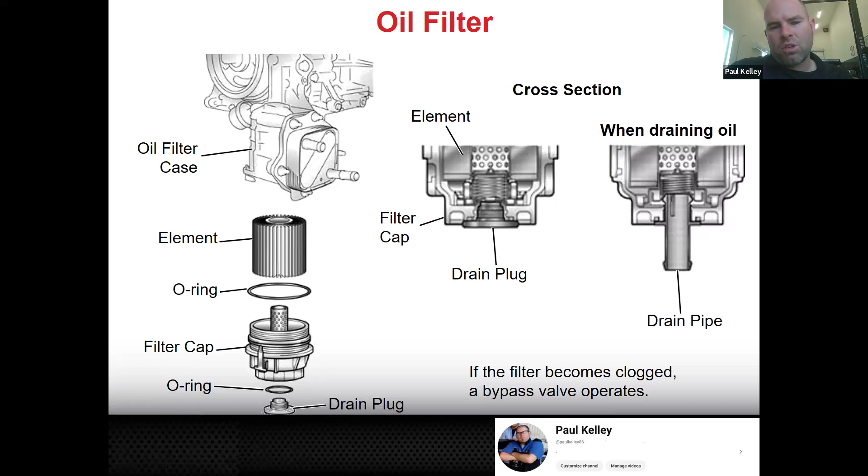So now you see, you guys can use the drain plug and the drain pipe. A lot of people don't, but you guys might. You can. It's neater. But you're familiar with these. Now here's your oil filter in action. Oil pump picks it up, sends it through one of the various types of oil pump designs. It technically actually sends it to the relief valve, but as long as it doesn't make excessive pressure, the relief valve should be closed. It doesn't really do anything. And then it sends it through the filter, and then it goes into the main oil gallery.

It's hard to find images with the actual bypass valve. It's a little bit abnormal to show it. You just have to know if the filter becomes clogged, the bypass valve will just let the oil go around. All right, cool. And then you've got some spin-ons, some cartridges, etc. Diesels are going to have big old oil filters. There's some different types. This one looks like it's probably going to be more for a diesel style, and these can be pretty expensive, by the way.

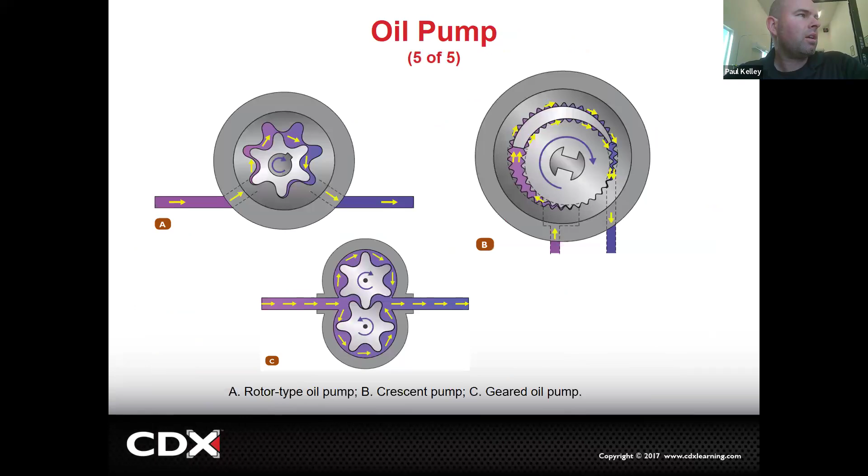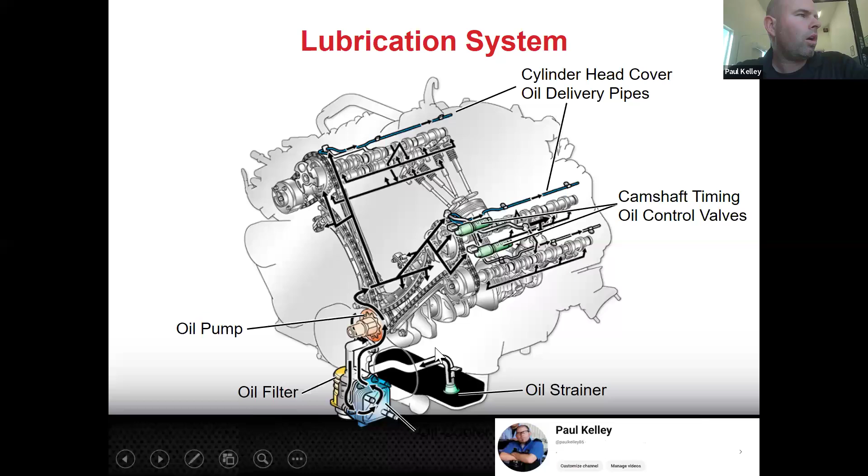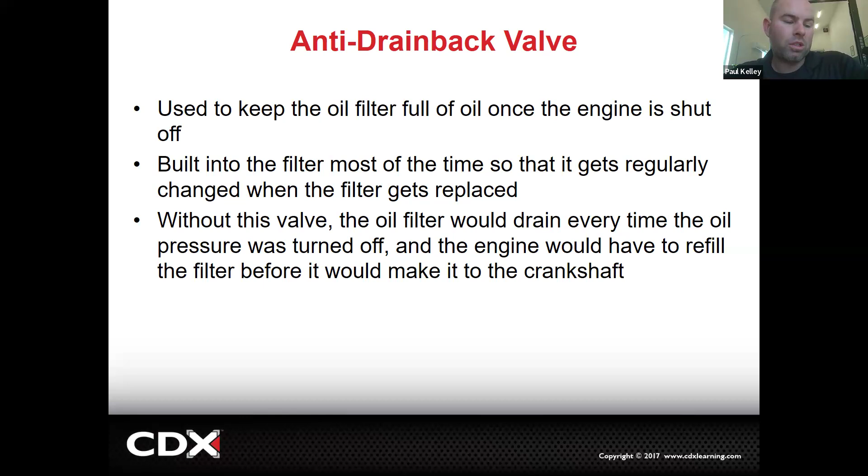So the factory filter actually had an anti-drain back, and this aftermarket filter didn't have one. So when we put the Kia oil filter on, it was fixed, and the customer was just shocked. I think they probably thought we were lying, but we weren't. That's the way it was. So that's the purpose of the drain back valve. Now you see why I have the AC Delco filters, the Toyota filters. I've just seen cars that lose oil pressure when parked due to the aftermarket filter.

Okay, and so this has got some more evidence. You could have lower oil pressure. That would be on the full flow systems, which is possible. It could explode. I've seen them ballooned. If you have an oil pressure relief valve that doesn't open, it could actually build excessive oil pressure and swell the filter up, balloon the oil filter.

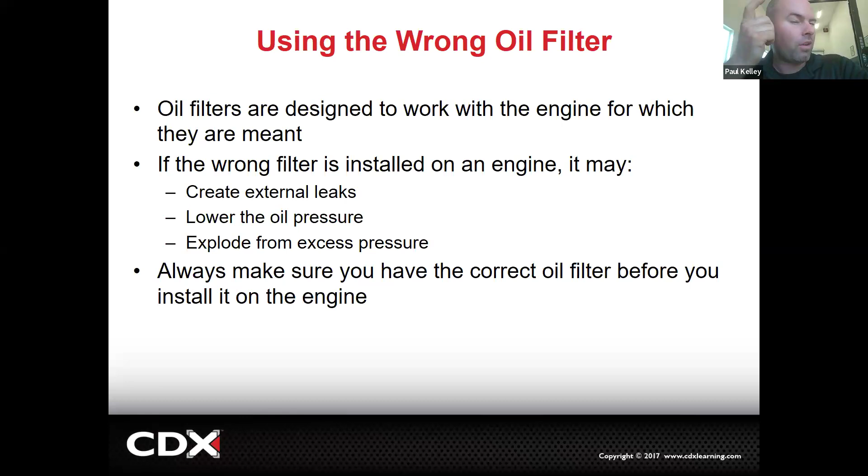That's actually been an ASE type question in the past. A ballooned oil filter would be a sticking oil pressure relief valve. Okay, make a note. And so just make sure you got the right one.

Now, another thing this talks about is spurt holes. So sometimes we pressurize oil to the bearing, and then there might actually be another passage in the rod where the bearing excess pressure should squirt out of this little hole, and that should, let's say, lubricate the bearing, but also sometimes we'll even try to lubricate the wrist pin, all sorts of stuff.

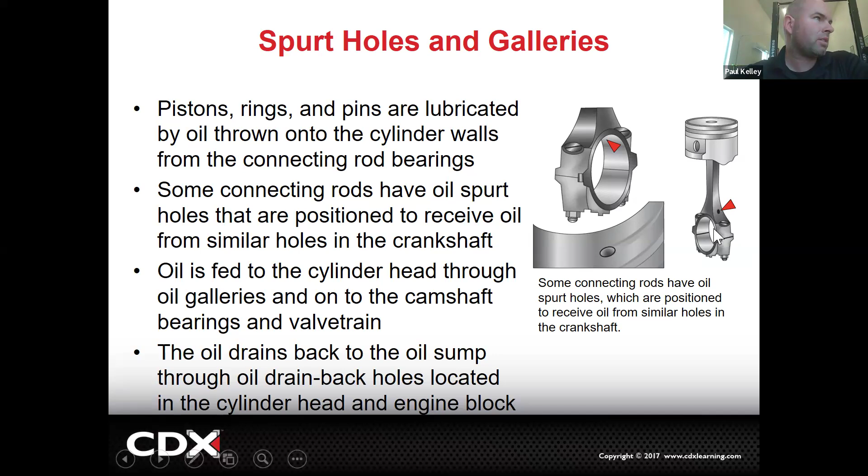So a little more details when we're doing the engine overhaul. That's why I spent so much time showing you how I clean the parts. Just brake cleaning it and shipping it doesn't tell me that I have no debris in this spurt hole or these passages. Right? So cleaning is important when it's a rebuild, critical.

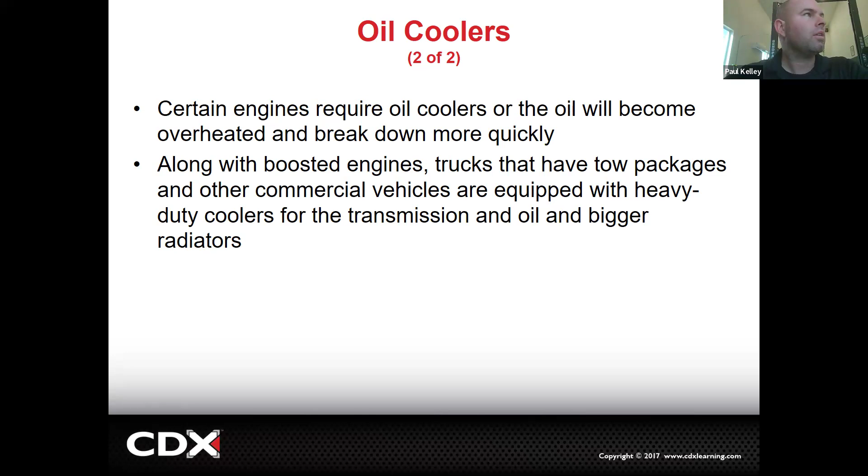Oil coolers are interesting. It's the same as actually a transmission cooler, except you're cooling the engine oil rather than the transmission. Later this semester, the next subject is transmissions.

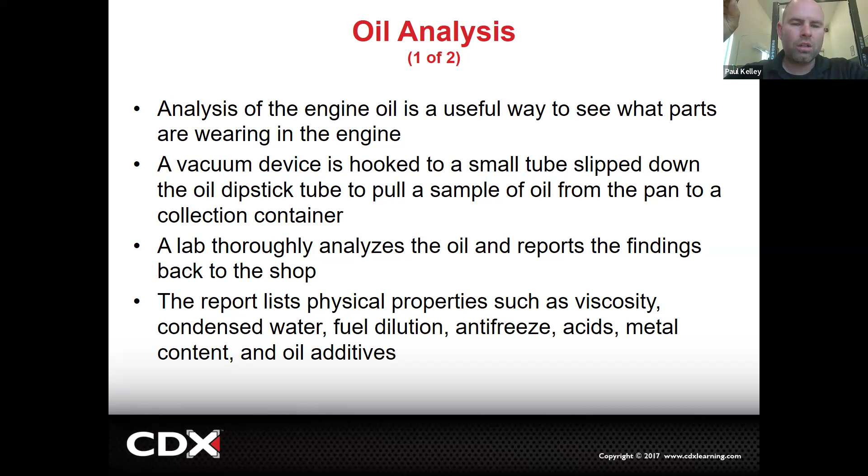Oil analysis, that's what we were kind of talking about. A lab could actually evaluate whether that oil's protecting it better, whether your engine has bearing material. An oil lab, that's what they do. A technician pulling the dipstick out, sniffing the oil, doesn't tell you much. It tells you if it smells good or bad. It tells you if it smells like gas. It tells you if your sense of smell is still working. It doesn't tell you anything at all about the quality of that oil, just so we're very clear. Cool. And so we can send those out.

How low? Too low. How low is too low? I don't know. Depends. They calibrate this to come on at a certain pressure. But that oil pressure, that means stop the car. Pull over and shut the engine off now, right now. You run it with no oil pressure like that for just minutes, it's done. Never going to bring it back.

About the low oil pressure reading, I had a car before where if I parked on a hill, slanted downwards, I would get that oil light, the red one. Okay. Yeah, I love that. That's a great example. What are anybody's thoughts? On a hill, why would it have low oil pressure? Would a majority of it be leaning to one side?

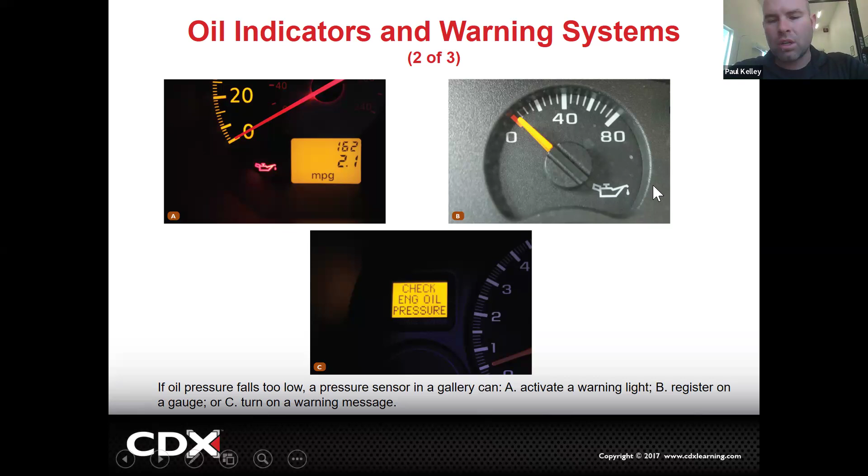That's old school. Now what's more likely, it'll have a full-blown sensor, and the sensor will send a voltage to the ECM, and the ECM will interpret it, and then the ECM will command this little stepper motor via duty cycle to point to a number. Okay, that's more modern. You could technically run into either one. Additionally, it's really common to have this message. Oil life monitoring: it's not checking oil pressure, it's not looking at oil temperature, it's not saying your oil level's low.

So I had a friend and he had a Silverado, and I don't remember if it was me, but I was at least a part of it, so I'm just gonna say it's me for simplification. I did the oil change, gave it back to him, and then his change engine oil soon light came on. He's like, man, you forgot to change my oil. I'm like, no, I changed the oil. I just forgot to reset the light. Nope. The system knows that oil's dirty. The system knows.

That system is checking the pressures and stuff. It knows that oil's dirty. I'm sure you forgot to change the oil. I'm like, no, dude, I'm telling you, I changed the oil. That light just comes on every 5,000 miles, period. Okay. It's not smart. It just comes on an interval. So mostly that's how the change engine oil soon systems work. So you guys all know.

But they do have more advanced ones. The first advanced one tracks not only your 5,000 miles, it looks at your mileage, your idle time, how many months it's been, your oil temperature, how long it was hot, you know, it looks at all these things, and it comes up with an algorithm to make the light come on. And those are actually better than a maintenance reminder, 5,000, 10,000, whatever. Those are better than a sticker.

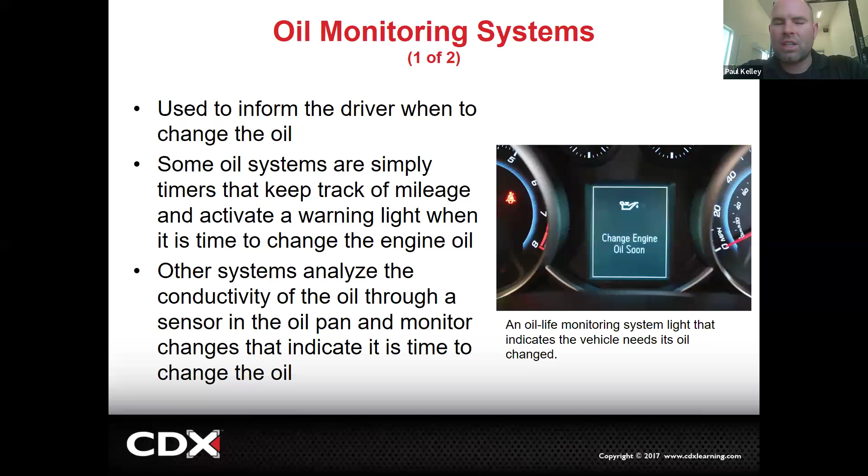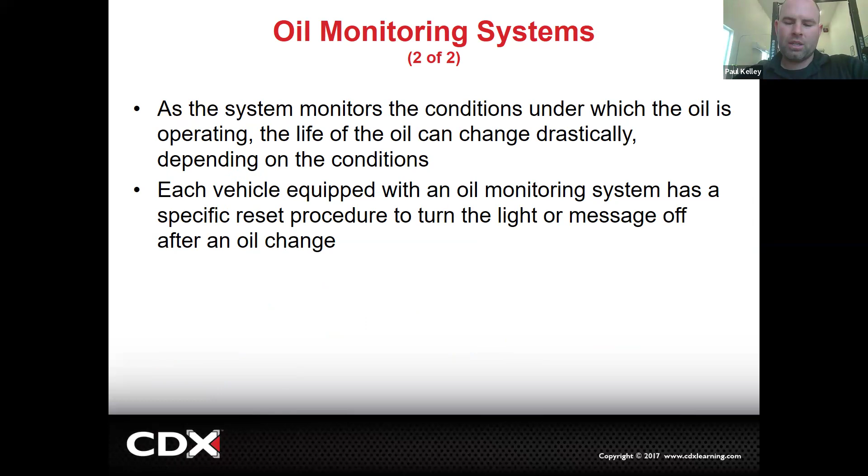And then you guys all know about resets. You're the experts of resets, so you should be good. The resets can vary. Trip B, odometer, plus press the gas pedal 3 times. Go through the information system, find the oil life, and press and hold. Sometimes it's through the radio. It can be all over the place, but there's a reset. On some cars, you actually have to do it with a scan tool. It's kind of frustrating.

Now, when we do our oil inspection, we're looking at the quality of oil. So if it's brown, it looks like a mocha frappuccino thing, whatever, that is being mixed with coolant or water. So we would suggest, hey, check out the head gasket, cracked head, cracked block. If it's thick and sludgy, that means it's overheated or it's been a long time. So if it's overheated, we got to find out why the engine is hot.

If it's been a long time, we got to slap the customer around and say, hey, did you forget to change your oil? Because there was an instructor at the school the other day saying he needed to change the oil. He used the shop while I was there on Saturday doing some hybrid training. And he pulls in and he's like, oh my gosh, I can't believe it, my oil filter is dated 2022. I can't believe that much time has gone by. I haven't changed the oil in 2 years. And I was thinking, uh-oh, don't want to do that, right?

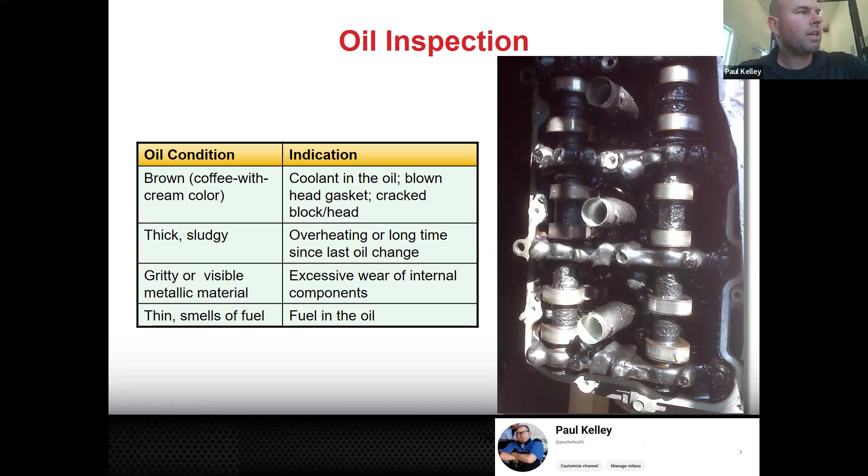Just generally speaking, if a technician comes up to you, especially with their hand behind their back, and they say, "Smell my finger," I probably wouldn't do it. Smell this dipstick? I might do it because it could be legit. I'm just not sure how legit it is, okay? Because it doesn't really happen that much anymore.

Now, when we go to diagnose it, you have to really understand what prompted it. If it's sludginess and you talk with the customer and you say, "Hey, how often are you changing your oil?" They may not be really honest, but if they say, "No, I'm changing it every 5,000 miles, I've got receipts and everything," well, then there is a chance that if we were to have maybe a major problem with the engine getting really hot all the time, it could actually sludge it up early.

Or there's even maybe some ways that the PCV system can cause sludging. So it's not to say that sludging is only possible due to lack of maintenance. It's just that one's the most common. Makes sense?

And then let's say that we were to have oil leaking seals, right? That's a little bit lubrication system related, but typically an oil leak is pretty easy to see visually. So we're going to want to be checking, maybe degreasing it, cleaning it, diagnosing the seal, replacing the seal. But how much oil it's losing from that seal is a little hard to say. So people get pretty ambitious with selling these timing cover reseals, and you'll see a slightly wet timing cover with some dirt on it and be like, "Your timing cover is leaking."

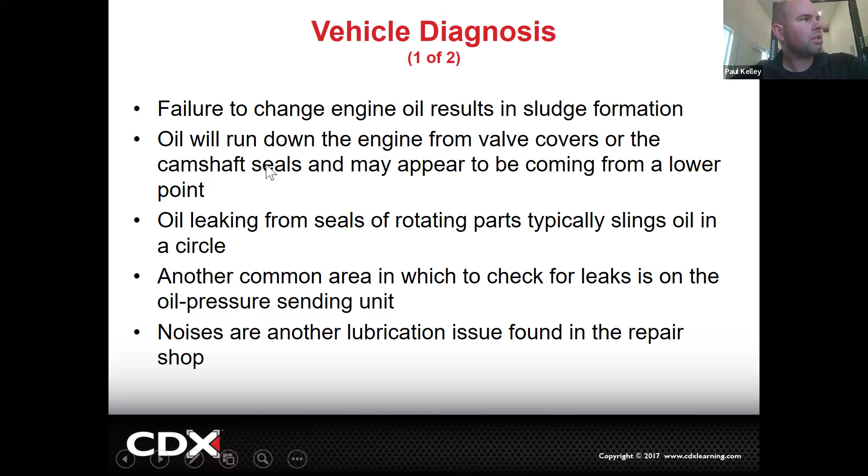That could also be caused though by low oil viscosity, so like fuel, or let's say they ran a 0W20 in a car that was supposed to have a 10W30 or something. That could cause ticking. Low oil can cause it too, by the way. But low oil would cause low oil pressure, so it's still low oil pressure. Now, burning oil, that's oil consumption. That's different. Oil consumption is where you don't have a leak necessarily, but it's consuming oil.

So if you want to do the consumption test, you're going to top the oil off, seal the cap, seal the dipstick, seal everything. Tell them to drive the car. They're going to drive the car for a certain number of miles. Maybe let's tell them 1,000, and it's going to come back, and you're going to pull the dipstick, which is going to break the seal that you made, and see how much oil it's lost.

If you're losing oil, first thing you got to check is leaks. But if there's no leaks and you do the consumption test and it's still losing oil, you know that could be being consumed, burnt by the engine. It could be maybe left on the cylinder walls and burned through the piston. Maybe you have worn piston rings. Could actually have a problem with the PCV system where the oil that's supposed to be captured by the PCV system has somehow ended up in the intake.

If it's a turbocharged car, you may actually have bad seals in the turbo on the center rotating assembly, and the oil is actually getting into the intake stream and it's consuming the oil. So there's so many different ways that the oil could be consumed. We'd actually probably have to do more diagnosis and possibly even a teardown. What would cause the oil to go through the PCV into the intake?

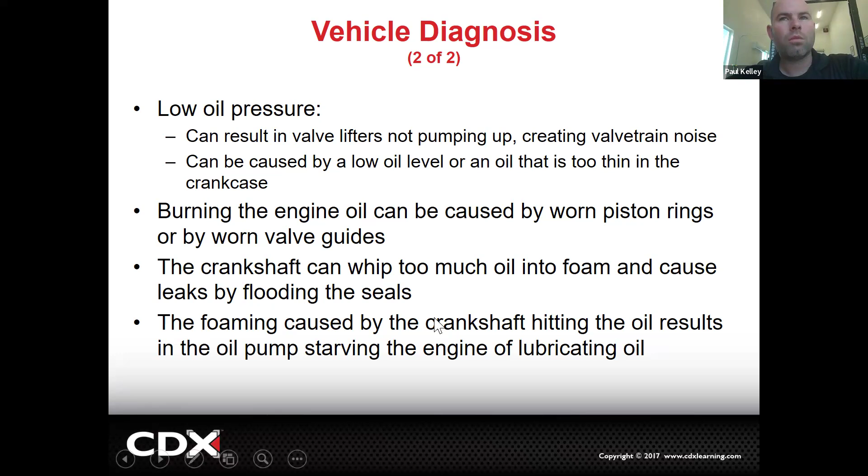Okay, cool. Now, the burning oil could also be from worn valve stem to valve guide, right? The clearance is excessive, that's going to have the oil running by the valve stem seal into the valve, dripping onto the cylinder. That would consume it. But you'd most likely get the smoking on first starts in the morning, so that's a little bit of a clue. And then low oil pressure can also be caused by foaming oil. So I'm going to pause that for one second. We're going to come back to that.

When we're going to diagnose, we could be using an oil pressure gauge, a DMM or DVOM, dye, oil pressure sending unit sockets, which are special. I have some here.

This is kind of old school, but an oil pressure sending unit may not actually have a regular hex. It might need a special socket. More lately, they've been more normal, but in some of the older school stuff, they had special sockets you needed to get them out. Sometimes we use a variable resistor. This is a little bit dated. Typically, what we would use now, we could actually use the scan tool, and we could do scan tool testing. That would be my number one tool for this.

But if you think it's got low oil pressure, and it may, the most concrete thing to do is to measure the oil pressure. We're going to be doing that this week. So you're going to literally go to where the oil pressure sensor is, take the sensor out, thread an adapter, hook the adapter up to hose, put on a gauge. Then you're going to start it, and you're going to follow TIS. TIS may say warm it up, measure it at 800 RPMs, measure it at 1,000 RPMs, measure it cold, measure it warm, whatever it says, compare it to spec.

But generally, the spec is just going to give you the minimum. It's not going to say it should be between 8 and 40. It's just going to say the minimum is 8. If you're above 8, you're good. See, it's kind of funny. They generally give the minimum oil pressure, and it's low too. It's lower than you'd think. That oil light won't come on until the oil pressure is very low, not kind of low.

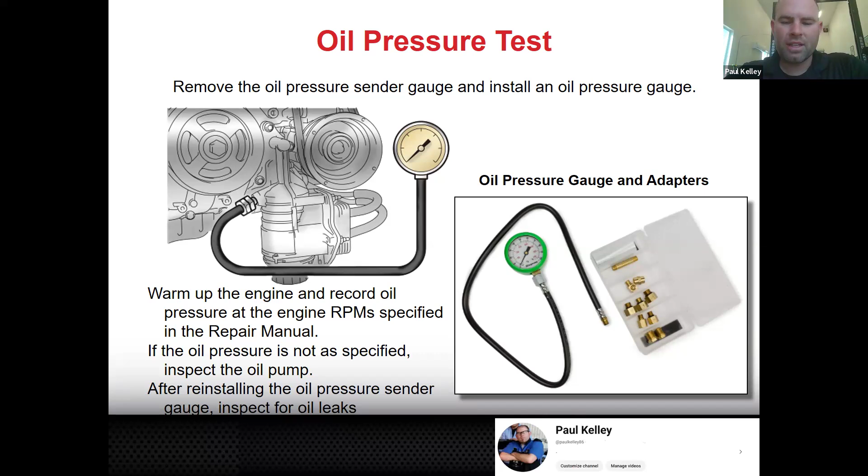Now let's just say it's low oil pressure. Here are the causes. Low oil level. I would probably check that first. That's keep it simple, stupid, do the basics, check the oil level. You could even smell it. Smells like gas, you got a problem. If it smells like sugar, you made enemies and somebody filled your crankcase with sugar. It's happened, right? Low oil level, that's common.

High oil level, what? Can someone explain this to me, please? Wouldn't high oil level cause high oil pressure? Is this a mistake? Anybody? Someone help? It's not a mistake. If you were to overfill the crankcase, think of what happens. You overfill it, the sump is still sucking in there. The reason the system makes pressure is it pulls a volume of oil. You filling it up too much doesn't make it pump more oil. You filling it up too much actually gets it closer to the crankshaft, and the crankshaft is spinning. And if the oil level is high and the crankshaft is spinning, what's going to happen to your oil?

What's it going to look like? It's getting whipped up by the crankshaft. You remember this? We talked about it. Nice and foamy looking. Foamy. And if it's foamy, it's aerated. So foamy and aerated, interchangeable. Foam is how it looks to you. The technical term would be it's aerated. It's got air mixed into it.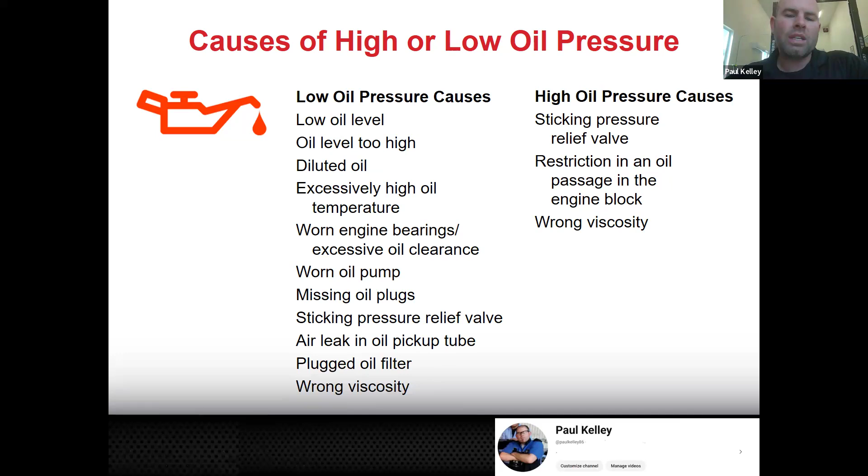When you get a low oil pressure concern, you've got to know it's all these things. But if you get a low oil light, you need to know, is it the light coming on when it shouldn't, or is it actually low? And then you've got to do troubleshooting.

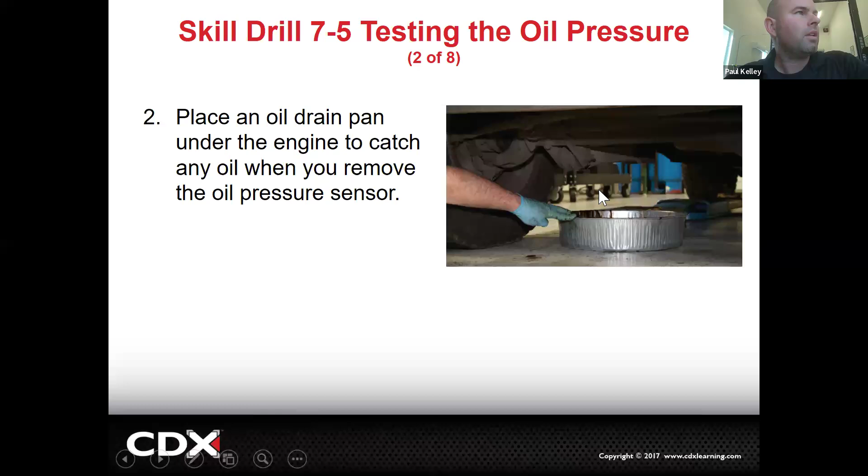Cool. And this shows you, here's the sensor or the sending unit right there. We're going to take that baby out. It's actually got pipe dope or PTFE, like Teflon tape or liquid Teflon, on there. Be very careful with these. Sometimes it's a straight thread with an O-ring. Other times it's what's called a pipe thread.

I actually brought a little, it's actually a nipple, if you must know. This is a pipe thread right here. If you were to look really carefully, this pipe thread is not straight up and down. It's actually tapered. It starts a little small and it gets a little bigger. With something that's pipe thread, when you go to thread it in, it's going to have Teflon tape or liquid stuff, which sometimes I'll call pipe dope. I had some, but I actually don't know where it's at right now.

So when we go to thread this in, it's going to start easy and it's going to get kind of hard to go, and you're going to see all these threads left. If you try to thread it till all the threads are buried in there, you will break whatever you're threading it into. We've had students try to hook up this oil pressure gauge, see there's still threads, so they keep cranking on it, and they literally cracked a timing cover.

All right, so I'm just letting you know, it might be straight thread, in which case it seals on the O-ring, but if it's tapered like this pipe thread, you're going to use Teflon tape and pipe dope, and then you're going to thread it in and torque it to spec, and it may only be 7 foot-pounds. And if you try to go 70 foot-pounds, something's going to break, and it's probably not going to be this. It's going to be the aluminum female cover that's going to go, right? In which case, somebody is going to be in trouble, okay?

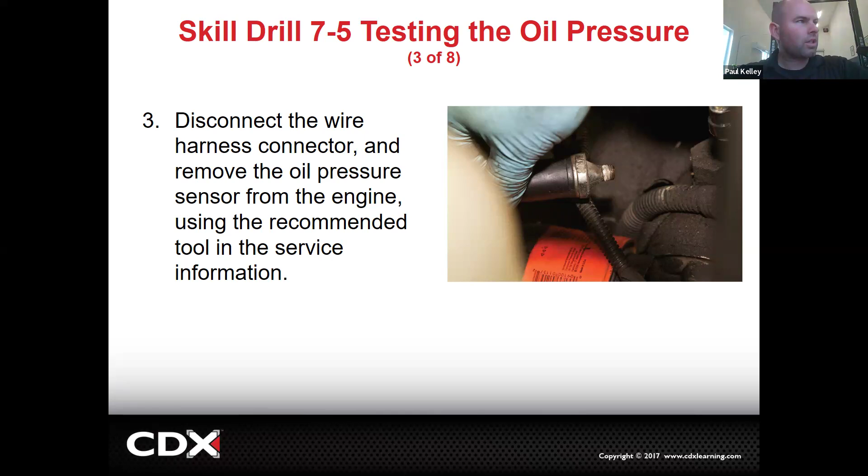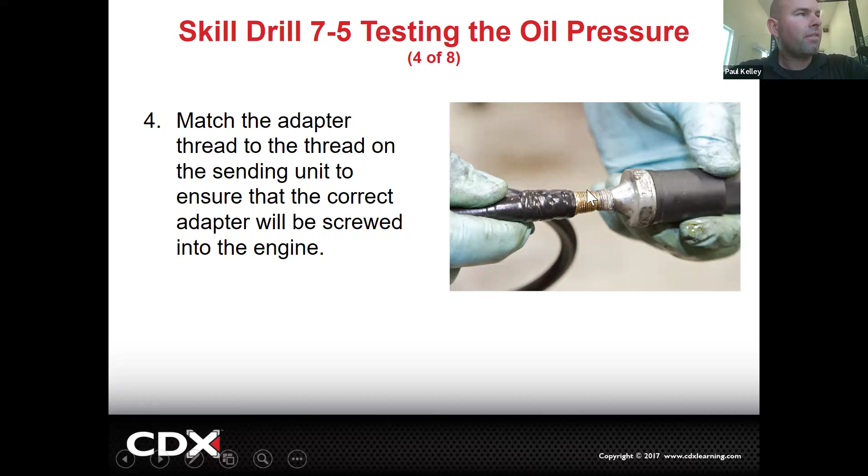So that being said, we're literally going to unthread that, and we're going to find the exact adapter. Like this one, see, we're matching these up. This one's tapered and this one's tapered. We're going to need to put some Teflon on here if we want it to not leak. Then we're going to thread it in, torque it to spec, 7 foot-pounds or something.

And then we should be able to start it and look at the oil pressure, measure the oil pressure. And then when we're done, record the oil pressure at different temperatures and engine speeds and all that type of stuff, record it, and then button it all up. And now you have your oil pressure.

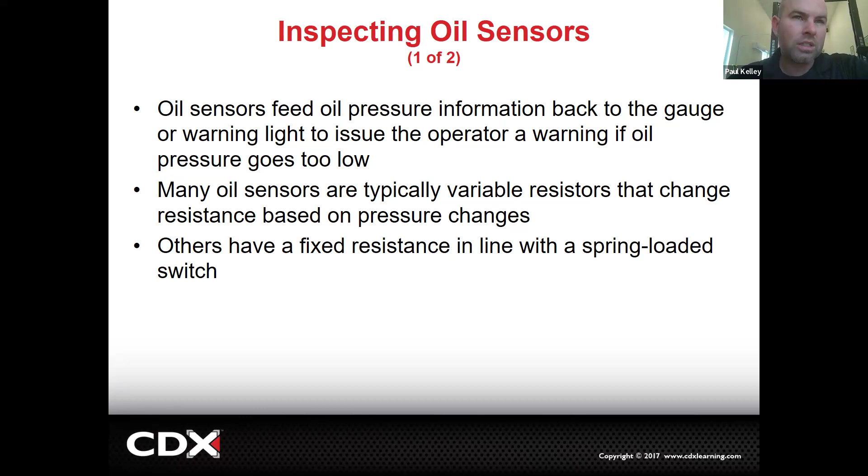Cool. Now, if you wanted to do oil sensors, probably what I would personally do is see what information you can get on the scan tool, because it's so much quicker. Hook up the scan tool and see how many PSI or how many volts it shows, and you could tell so much. But back in the day, what they would do is try to put different resistors in to simulate good pressure to see if it would turn the light off. It was kind of old school.

You think? If I send 12 volts to the light, exactly, ground. I heard you start to say it. So if I send 12 volts to the light, anytime the key's on and the light is on, that means it's grounded, right? That means the blue wire is grounded. Why is the blue wire grounded when I do 2 clicks of the key? Key on, engine off. Why?

It makes contact. True. So in here, when we don't have enough oil pressure, it's grounded. It's grounded because it's threaded into the block or the oil filter housing, wherever it's at. With 0 oil pressure, I promise you that oil pressure sensor, sending unit, switch, whatever is going to be grounded. It's just the way it is. So when we start the engine, you notice it takes a second and then the genie lamp turns off, right? Anybody think they know why?

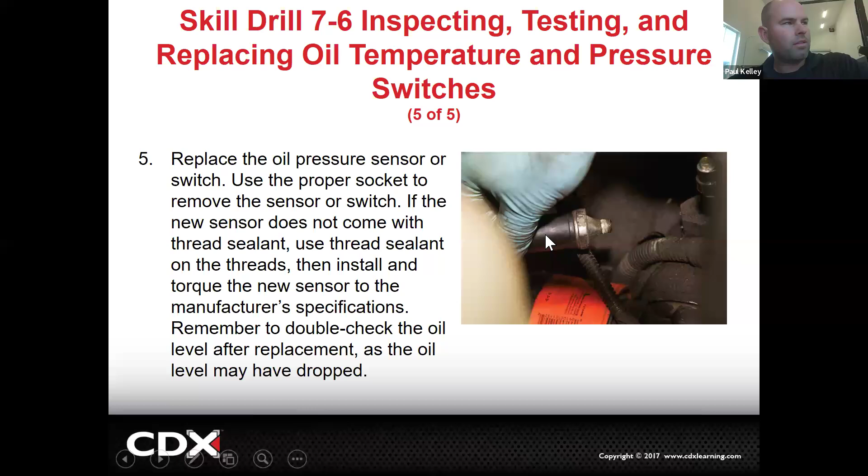If it has the ground while it's running, then we need to shut it off, and we need to unthread it, and we need to hook up the gauge, and then we need to measure the actual oil pressure. If your oil pressure is good, then you know that sending unit is bad. Makes sense.

If your oil pressure is good, but your switch is still providing ground, there's something wrong inside. We're done. We know it's no good. If your oil pressure is bad, you're not worried about the sensor or the switch anymore. You're diagnosing oil pressure. You might have to do teardown. You might have to do whatever. Okay, so it's actually really pretty simple.

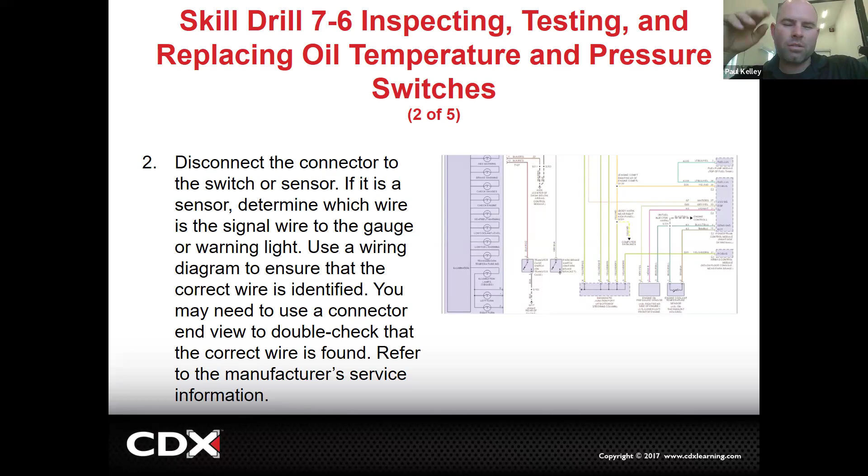You can actually jump the 5 volts to the signal wire and look at the scan tool and see it spikes up. You could unjump that, jump the ground to the signal wire, see if it pegs low. That's really just telling you about the circuit. If the circuit passes, then you change the sensor. If the circuit fails, then you have to measure from A to B. Is it in the 5-volt wire? Is it in the ground wire? Is it in the signal wire? So it's the same as any of the 3-wire stuff. Truth be told, though, the A1 is not really focused on that, so I don't really focus on that.

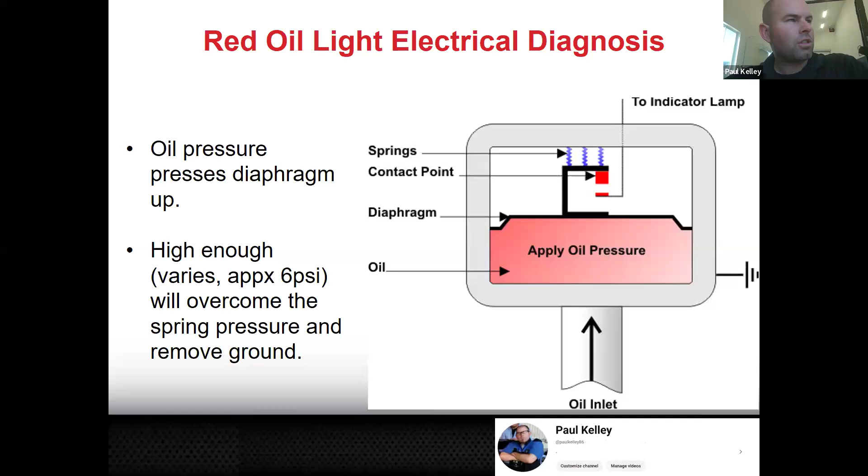Okay, now let's say it's low oil pressure. This is probably the number one thing that I'd be concerned about. Bearings wear, it's what they do. If it's got low miles, I might not jump to this. But if it's got a bunch of miles on it and it's got low oil pressure, I'd be like, I wonder if it's got worn main bearings. To know that, you know what you got to do, right? You're gonna have to tear the crank out of it and do the Plastigage. If it's got very worn main bearings, you're gonna have a very tiny Plastigage smear because the main bearings are worn. So maybe it just needs main bearings, or you're gonna do probably a rebuild. That happens at high miles, but it's inevitable. Eventually, those bearings are gonna wear.

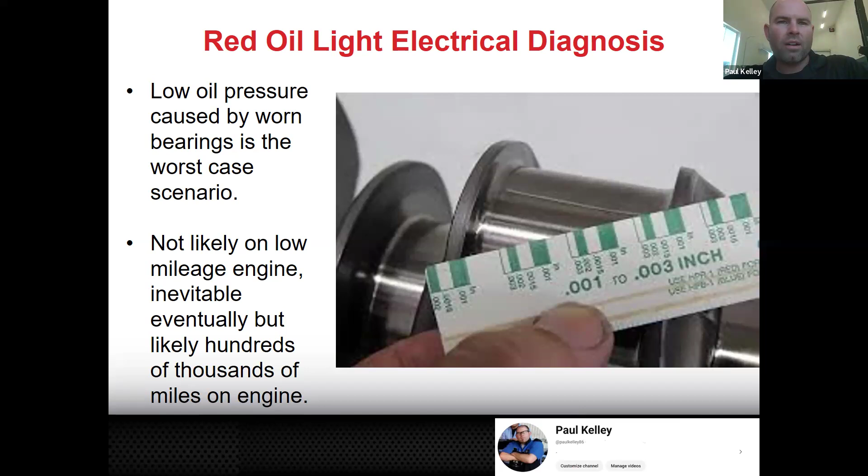Make sense? It's kind of weird because the drive gear is actually driven by the crankshaft. Does that make it the driven gear? Well, not really, because we're just talking about in the pump. This gear does the driving. We don't worry where it's being driven from. Make sense? Drive gear, driven gear, tip clearance. You have to know that.

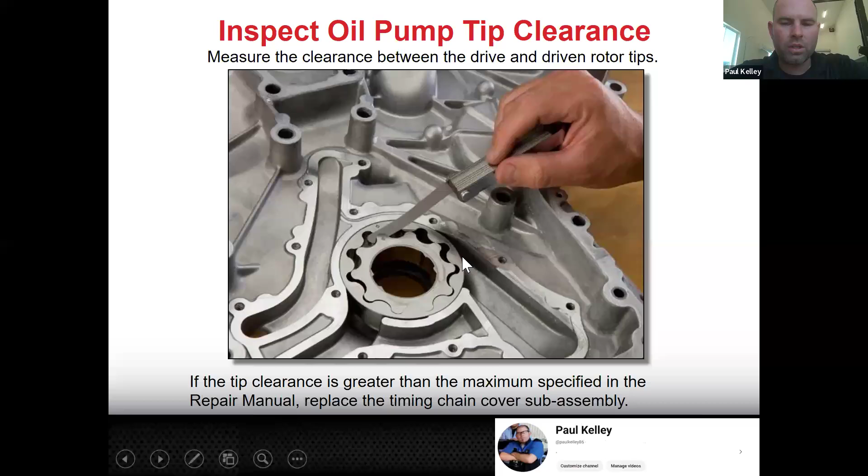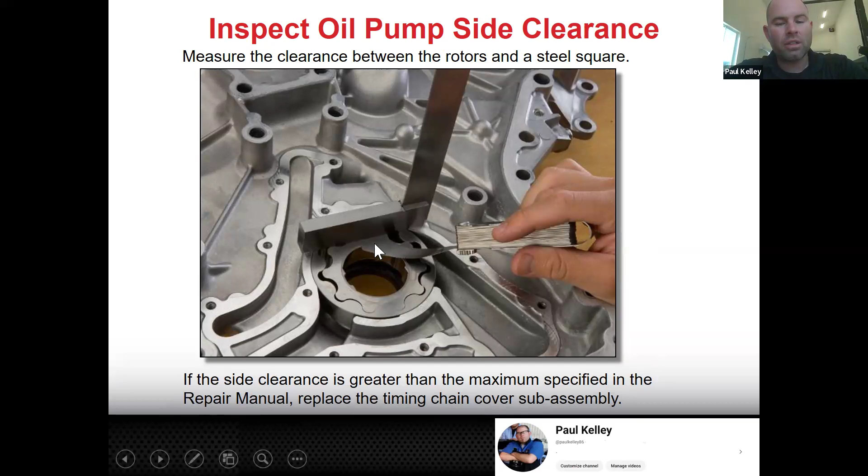Next, we're measuring a lot of times what we'll call side clearance. We're going to lay a straight edge, in this case a square, but we're using the straight edge part of the square, which is legit. And we're going to try to slide a feeler gauge in the face. Sometimes we'll even call it face clearance, by the way, in the face of the gear to the straight edge to see if there's any clearance at the face, or side clearance, right? The drive gear, the driven gear, sometimes even the housing.

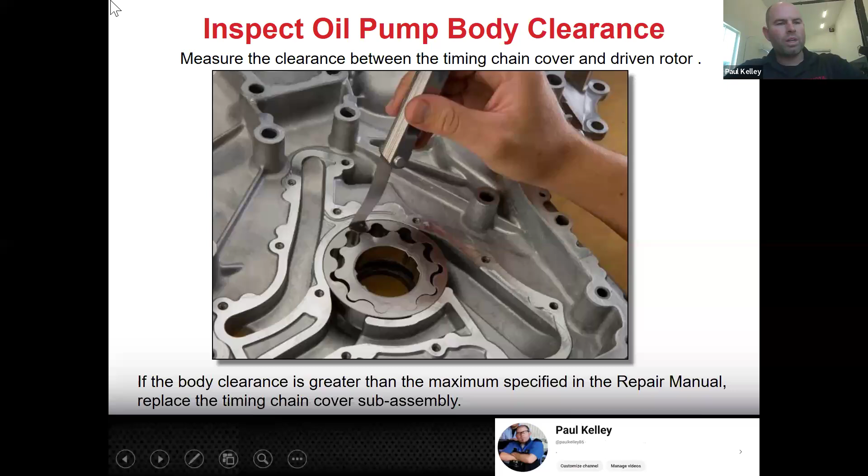Okay, that would be face. That would be tip. That is a different measurement than this measurement. If you pick the wrong answer, you're going to get that question wrong. Okay. That is basically exactly where I want you to be. And if you can understand all those, you're going to be in pretty good shape for this ASE.